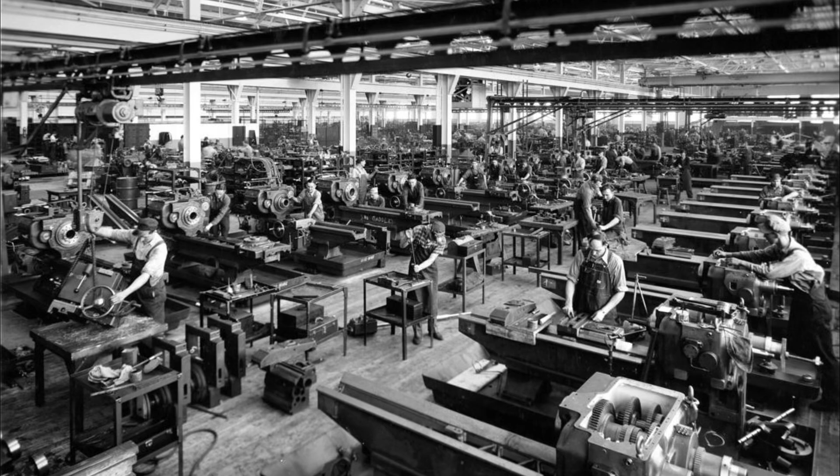In the fall of 1943, a machine running on Factory Street in Rockford, Illinois, had never seen the aircraft it was helping to build. It never would. The machine was an Ingersoll transfer line, a chain of 12 cutting stations linked by an automated conveyor, each station removing a precisely calculated amount of metal from a cast iron blank, moving through at a rate no human hand could match and no single machine could sustain.

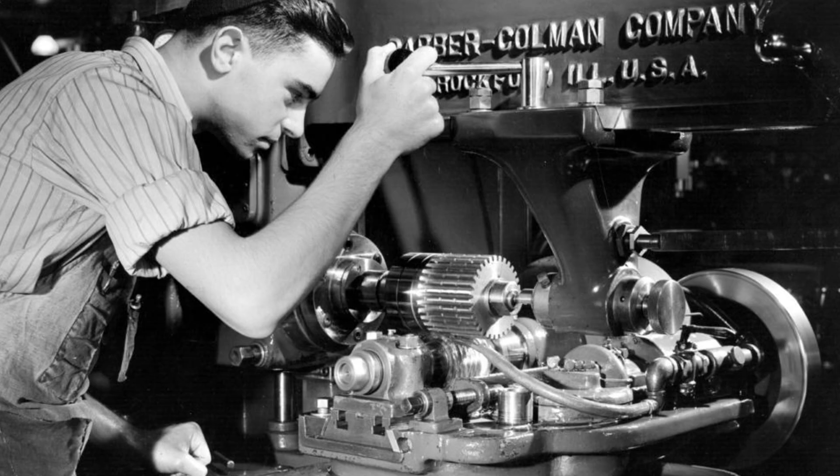At the end of the line, what had entered as a raw casting emerged as a finished crankcase for the Wright R3350 Duplex Cyclone, the 18-cylinder, 2,200 horsepower engine that would power the B-29 Superfortress over the Pacific.

The tolerances on that crankcase were held to 2 ten-thousandths of an inch, not 2 thousandths. Two ten-thousandths, a dimension smaller than the width of a human hair, held across a cast iron surface the size of a kitchen table, repeated 500 times per 8-hour shift by a machine that did not know what it was making and did not need to.

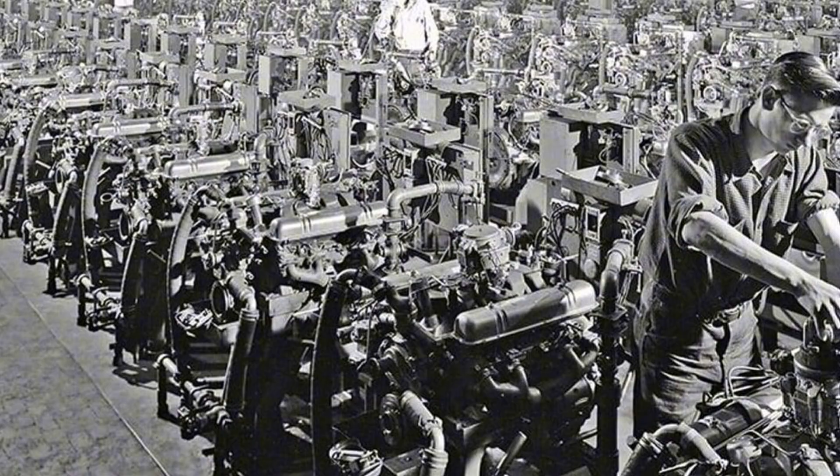The machine that held those tolerances was designed in Rockford, Illinois, built in Rockford, Illinois, shipped from Rockford, Illinois by men who would spend their careers building things they would never fully see the purpose of, and who understood, in the way that skilled industrial workers understand things, that the purpose was not theirs to see. Their job was the tolerance. The tolerance was the point.

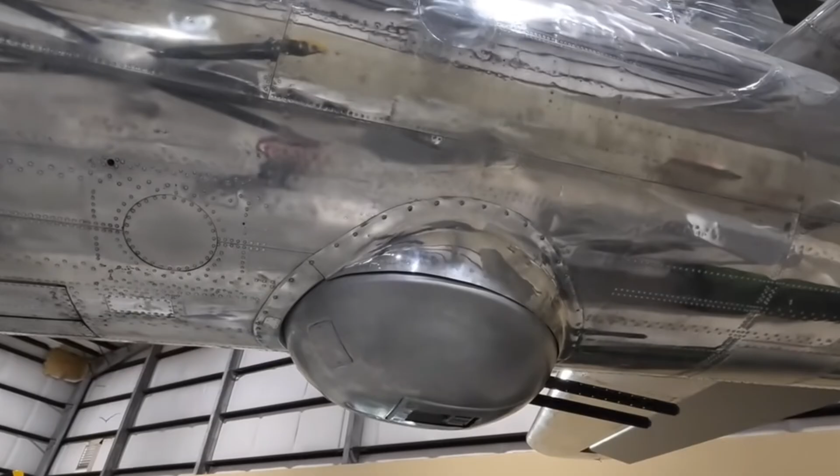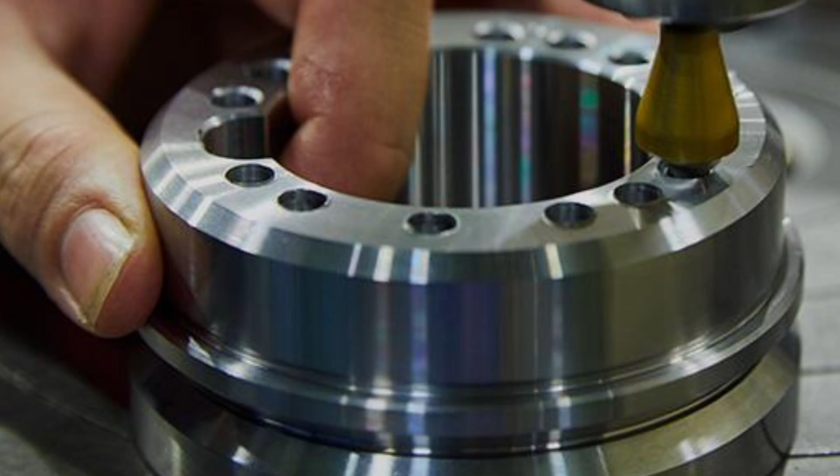By 2001, the company that built that machine no longer existed. The name Ingersoll had been sold. The Factory Street plant had gone quiet. The 4,000 men and women who had worked three shifts a day through the war years, through the post-war boom, through the golden decade of American automotive manufacturing, were gone. Rockford, Illinois, the city that had produced more machine tools per capita than any city in America at the height of its power, was reckoning with what a Rust Belt city reckons with when the last plant closes and the county employment office runs out of forms.

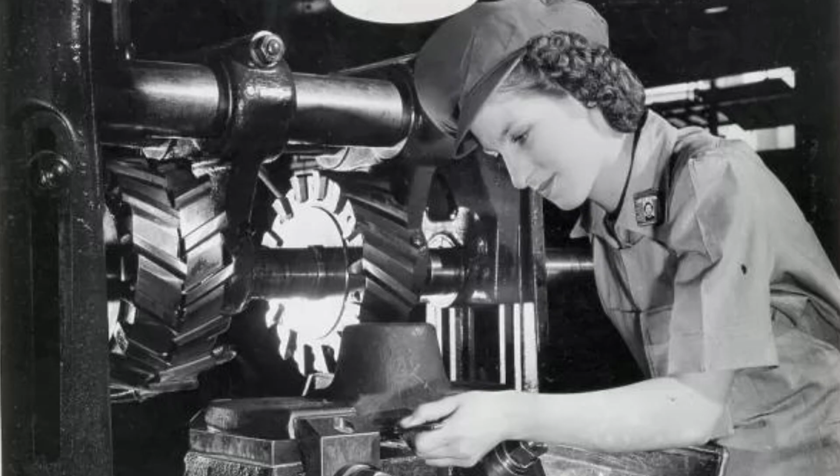A decade before the end, Ingersoll had been the company that every major American automaker called when they needed to retool a plant: General Motors, Ford, Chrysler. When they needed a system, not a machine - a system capable of taking a raw casting in one end and delivering a finished engine block out the other without a human hand touching the metal between stations - there was one American company whose engineering staff could design it, whose factory could build it, and whose installation teams could commission it and hand it over to production running at rated cycle time.

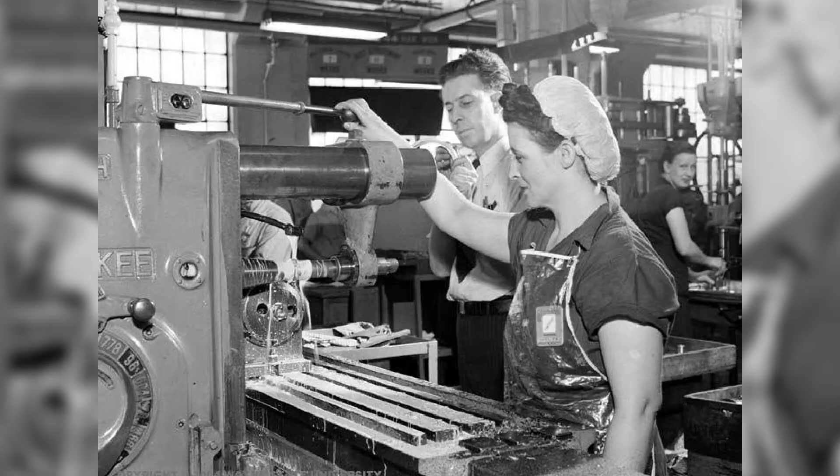That company was Ingersoll. But the real story of Ingersoll Milling Machine is not the story of a company that failed to compete. It is the story of a manufacturing philosophy, the American belief that precision at scale, achieved through specialized machinery engineered for a single purpose and built to last 20 years, was the foundation on which industrial civilization rested. And what happened when the market decided it was wrong?

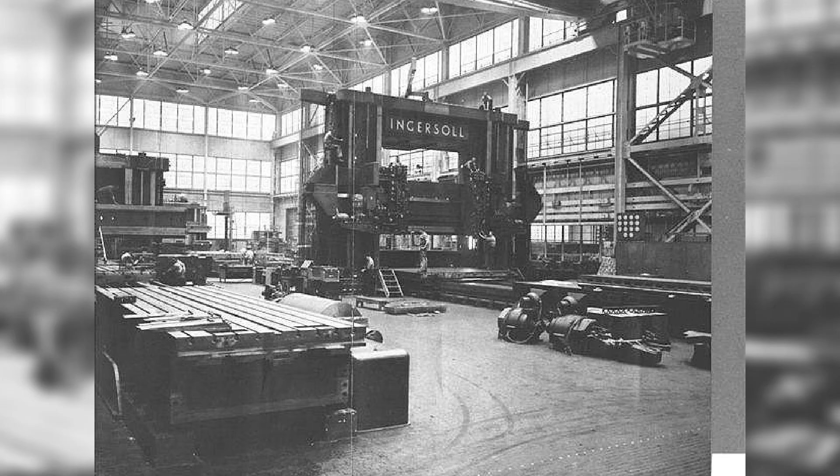Rockford had iron. It had rail access. It had men who knew how to work metal. What it did not yet have was a company that could translate those assets into something the American factory had never been offered before. Leander Ingersoll founded the Ingersoll Milling Machine Company on Factory Street in 1887. He was a machinist by trade, trained in the Illinois River Valley tradition of practical mechanical engineering, the tradition that built farm equipment and river machinery and the early infrastructure of a continent that was still being assembled.

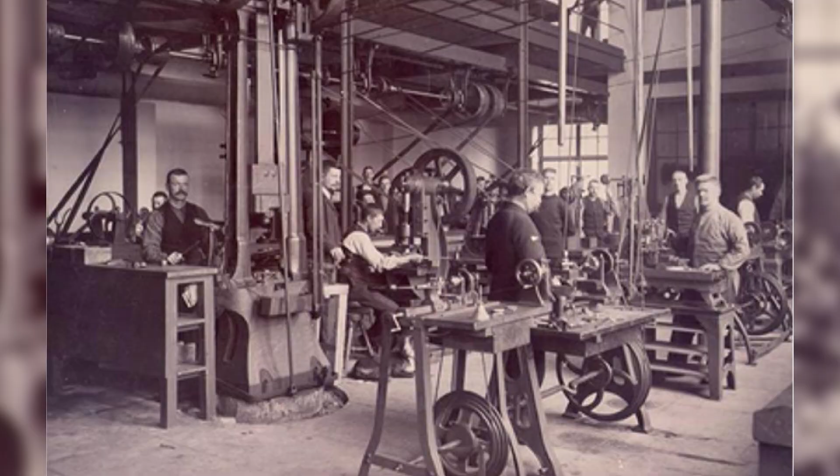He had watched the American factory floor long enough to understand its central problem, and the central problem was not precision. American machinists had precision. The central problem was repeatability at volume, the ability to produce not one correct part, but 10,000 correct parts to the same dimension at a cost per unit that made mass production economically possible.

The machine tool of Leander Ingersoll's era was by design a general-purpose instrument - a milling machine, a lathe, a drill press. Each was operated by a skilled machinist who set up the work, made the cut, measured the result, and moved to the next piece. The skill was in the man. The machine was a platform for that skill. And for a century of American manufacturing, that relationship had been sufficient.

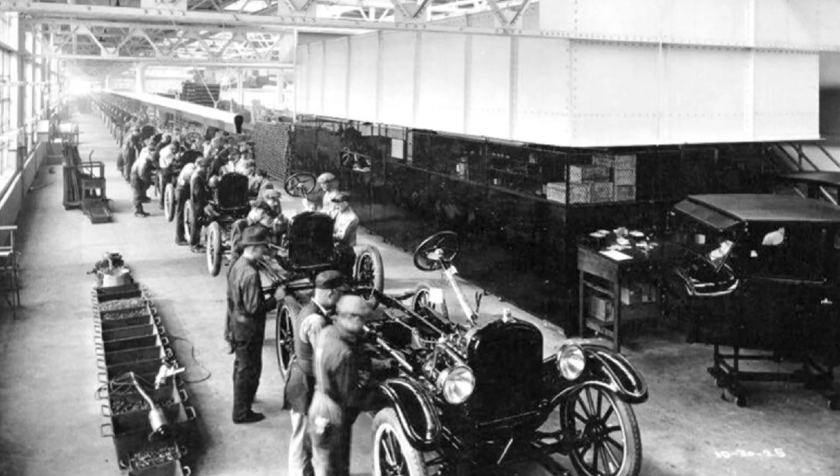It was no longer sufficient. Henry Ford had begun to make clear in the decade before Ingersoll's founding, and in the decades immediately after, the future of American manufacturing was not skilled machinists producing parts one at a time. It was systems producing parts continuously, one after another, without interruption, without setup time between pieces, without the accumulated variation that even the most skilled machinist introduced when he repositioned a part by hand. Ford did not need better machinists. Ford needed a machine that did not require a machinist between parts.

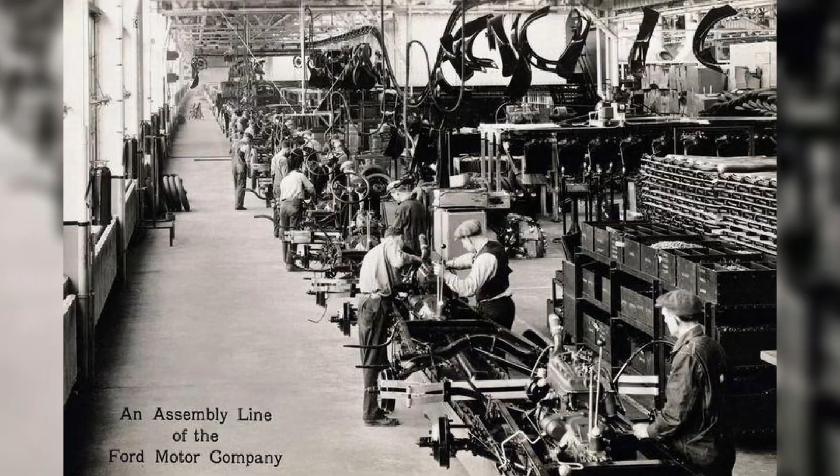What the American factory floor was missing in 1887, in 1900, and in 1910 was a transfer line. A transfer line is not a machine in the sense that a milling machine or a lathe is a machine. It is a system, a series of machining stations linked by an automated conveyor that moves the workpiece from station to station without human intervention.

Each station performs one operation. A drilling head bores a specific set of holes to a specific depth. A milling head removes a specific surface to a specific flatness. A tapping station threads a specific set of holes to a specific pitch. The workpiece arrives at each station in the same orientation, held in the same fixture, located to the same datum surfaces every time, because the fixture does not change between pieces and the conveyor does not deviate.

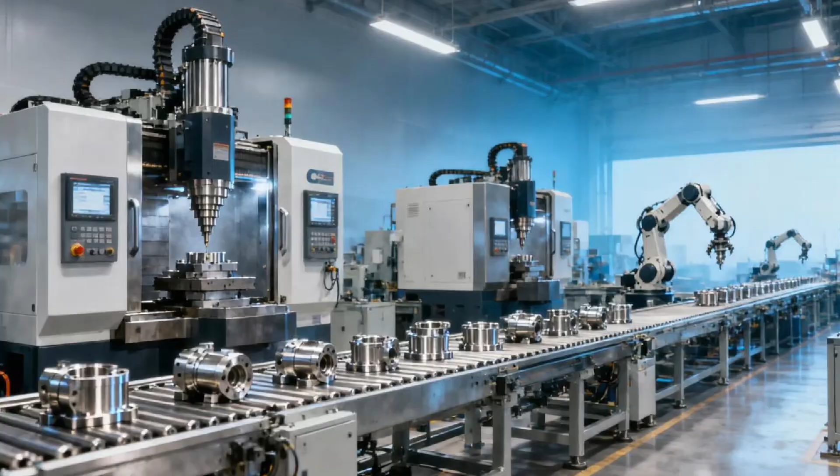The variation that a skilled machinist could not prevent when repositioning a part by hand was eliminated not by improving the machinist, but by removing the repositioning.

Ingersoll did not invent the concept, but Ingersoll was the first American company to engineer it at the scale and precision that the American automotive industry required, and to build the organizational capability to design, manufacture, and install custom transfer line systems for customers whose production requirements were unlike anything the machine tool industry had previously been asked to solve.

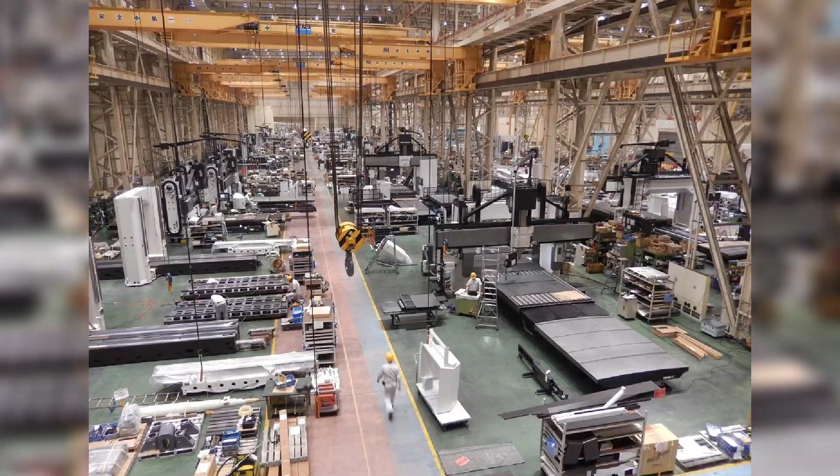The first major transfer line Ingersoll delivered to the American automotive industry went to Ford's River Rouge complex in Dearborn, Michigan, in the early 1920s. The contract value was in the range of $800,000 to $1.2 million, the equivalent of $13 to $18 million today.

It was not sold through a machine tool dealer. There were no machine tool dealers who handled equipment of this scale and complexity. Ingersoll's engineering staff went directly to Ford's plant engineers, designed the system to Ford's production specifications, built it on Factory Street, and installed it in Dearborn with Ingersoll's own installation crews. That model - direct engineering engagement, custom design, factory build, factory installation - was not a sales strategy. It was the only way the product could exist.

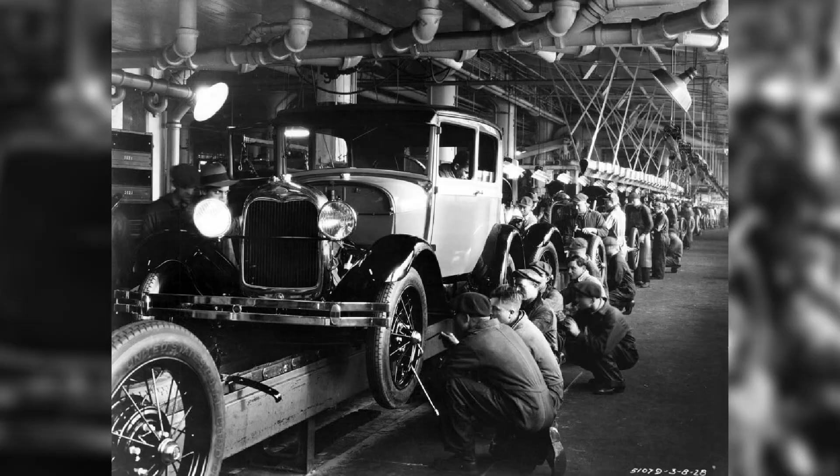A transfer line was not a catalog item. It was an engineered solution to a specific production problem, and no two were identical. The engineering knowledge required to design one correctly lived inside Ingersoll's staff. It could not be purchased from a distributor or reverse engineered from a competitor's catalog, because no competitor's catalog contained it.

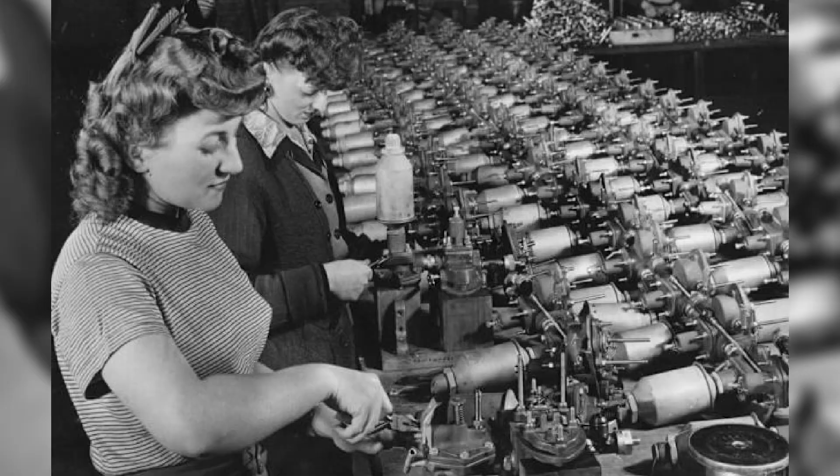American Machinist magazine covered the River Rouge installation as a milestone in American production engineering. The Thomas Register of American Manufacturers listed Ingersoll under a category that had effectively one entry. By the late 1920s, when General Motors began its first major plant expansion under Alfred Sloan's divisional production system, the call went to Rockford. At its peak, the Factory Street plant employed approximately 4,000 workers across engineering, manufacturing, and field installation. They were not interchangeable with the workforce of any other machine tool builder in America, because the work they did did not exist anywhere else in America.

That was Ingersoll's advantage. It was also, as the story will show, the precise nature of its vulnerability. But in 1932, none of that was visible yet.

In 1932, Ingersoll was about to build something that would define American manufacturing for the next 50 years and put an 8-cylinder engine under the hood of every American who could afford one.

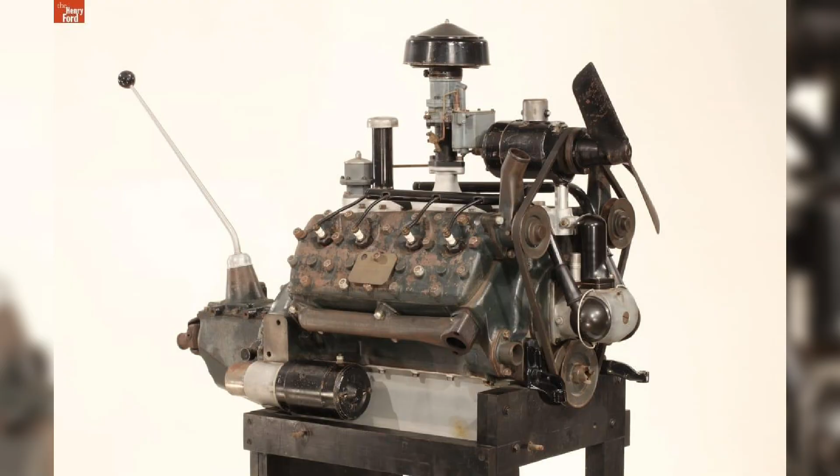In the spring of 1932, Ford Motor Company had a problem. Henry Ford had promised the American public a V8 engine in a car priced for the working man. The engineering was solved, the metallurgy was solved. The problem was production. A V8 engine block, 8 cylinders arranged in 2 banks of 4, cast as a single iron unit, was among the most geometrically complex castings the American automotive industry had ever attempted to machine at volume. It required more than 400 individual machining operations, drilling, boring, milling, tapping, reaming each, to tolerances that the engine's performance depended on, each to be repeated on every block that came down the line at a production rate that made the Ford V8 affordable at the price Ford had publicly committed to.

No single machine could do it. No team of machinists working individual machines could do it at the volume Ford needed at the cost Ford required with the consistency Ford's tolerances demanded. Ford called Rockford. The transfer line that Ingersoll designed and delivered for the Ford V8 engine block was unlike anything the American factory floor had seen.

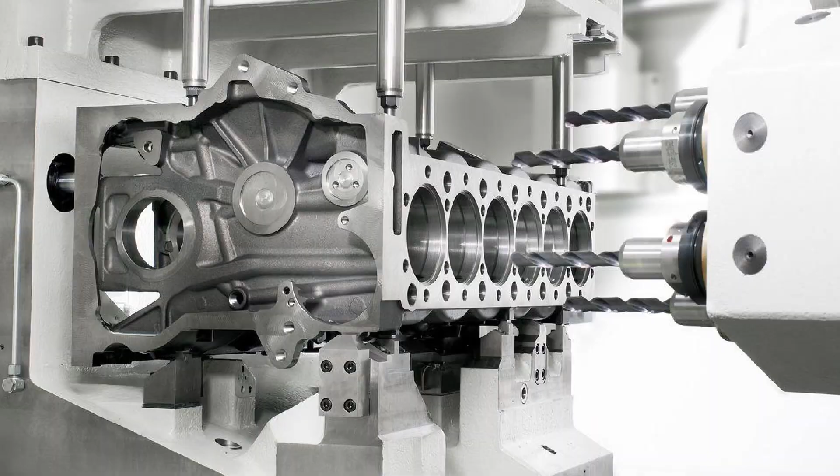It ran more than 60 feet from end to end, longer than the distance from home plate to first base on a regulation baseball diamond. It weighed in total over 200 tons of cast iron, precision ground steel, and hardened tooling. It contained 15 machining stations, each equipped with custom-designed spindle heads, the rotating assemblies that held and drove the cutting tools, positioned to engage the casting at angles and depths calculated specifically for that one engine block and no other.

At each station, the block was located, positioned, and clamped in a fixture, a precision-machined iron casting that held the workpiece against 3 datum surfaces, ground flat to within 0.005 of an inch per foot, so that every block arrived at every cutting tool in exactly the same position as every block before it. The fixture did not adjust. The conveyor did not vary. The spindle head did not compensate for human judgment. The system assumed that if every input was controlled, every output would be correct, and it was right.

The cycle time was 48 seconds per station, 15 stations, 1 block entering the line every 48 seconds, 500 finished engine blocks per 8-hour shift. At $12 million for the complete installation, the equivalent of approximately $260 million today, the Ford V8 transfer line was not a machine tool purchase.

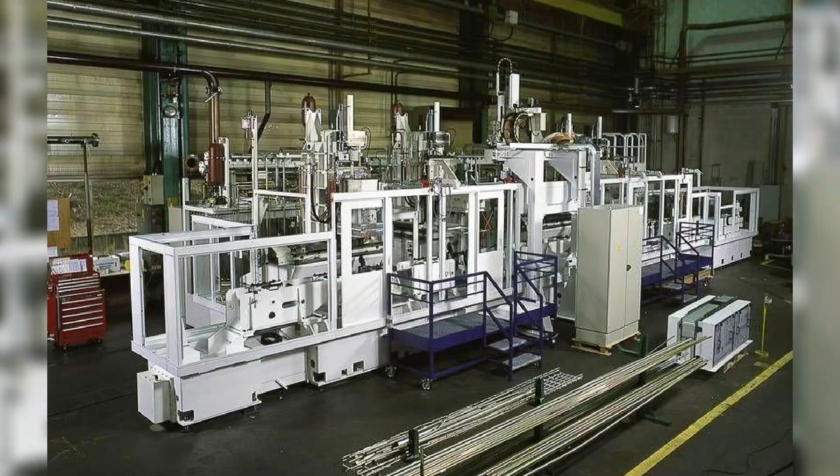It was a capital infrastructure decision of the same order as building a new foundry or acquiring a stamping plant. A senior Ford machinist in 1932 earned approximately 75 cents an hour. The transfer line cost more than 8 million hours of that machinist's labor. Ford signed the contract because the arithmetic was not close. The transfer line would pay for itself in reduced labor cost within 4 years of operation, and it would run for 20.

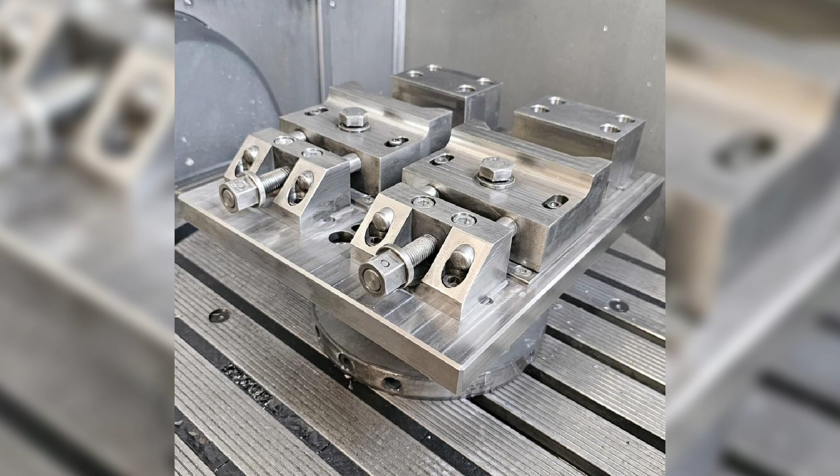No Japanese machine tool builder could have offered an equivalent system in 1932. No German builder, no British builder. The engineering knowledge to design a 15-station transfer line for a V8 engine block, to calculate the cutting forces at each station, to design the fixture datums, to specify the spindle-bearing preloads that would hold tolerances across 3 shifts a day for 2 decades existed in one place on Earth. It existed on Factory Street in Rockford, Illinois, in the heads of Ingersoll's engineering staff, and in the accumulated drawings and process records of 30 years of custom transfer line work. That was Ingersoll's moat, not a patent, not a price advantage, not a distribution network. Knowledge-specific, accumulated, non-transferable knowledge that no competitor could acquire without building the same history that had produced it.

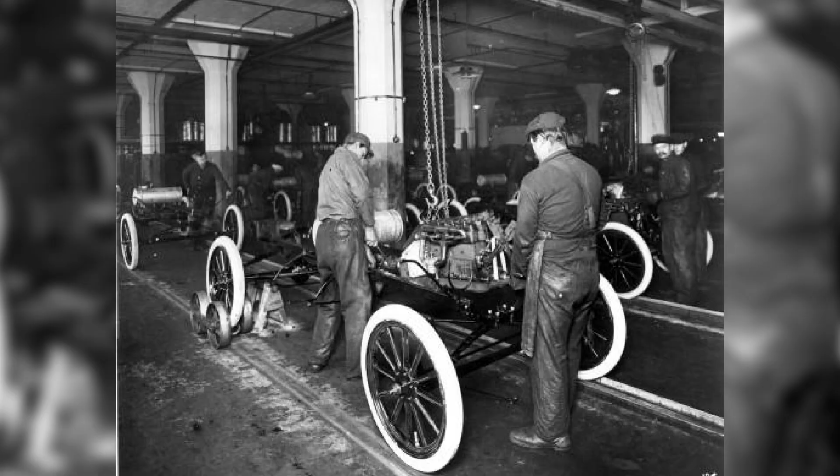The Ford V8 went into production in the spring of 1932. It was priced at $460 for the base model, the first V8 automobile available to American working families at a price they could consider. Within 2 years, Ford had sold over 1 million V8-powered vehicles. The engine that made that possible was machined on an Ingersoll transfer line in Dearborn, Michigan, running at 500 blocks per shift, holding tolerances that Ford's own engineers had initially questioned whether any machine system could maintain.

General Motors ordered its first Ingersoll transfer line for the Chevrolet engine plant in Flint, Michigan, before the Ford installation was complete. Chrysler followed within 18 months. By 1936, every major American automotive engine plant was either running Ingersoll transfer line equipment or waiting for a delivery slot on Ingersoll's Factory Street production schedule.

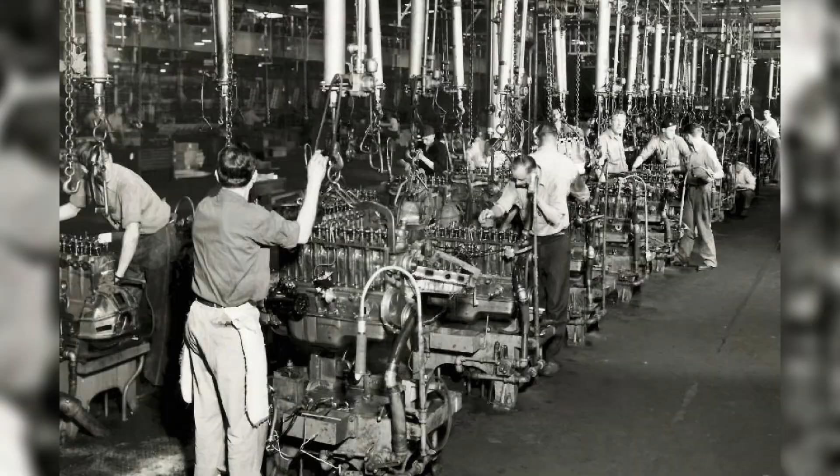The institutional endorsement list was not assembled over decades. It arrived in a single decade because the Ford V8 contract was not a reference sale. It was a demonstration visible to every plant engineer in the American automotive industry that Ingersoll had solved a problem the industry had not known how to state precisely until Ingersoll stated it for them. The problem was this: precision at volume achieved through a system engineered for one purpose was worth more than flexibility achieved through general-purpose machines operated by skilled men. When the part was complex enough, and the volume was high enough, and the tolerances were tight enough, the transfer line did not merely outperform the alternative. It made the alternative impossible.

The nameplate on the transfer line's main frame read, Ingersoll Milling Machine Company, Rockford, Illinois. In every engine plant that ran one, that nameplate was not a city of origin. It was a production guarantee. The Ford V8 contract had done something that no amount of advertising in American Machinist magazine could have accomplished. It had made Ingersoll's capability legible to every plant engineer in American industry, not as a promise in a catalog, but as a running system in a production plant that anyone with sufficient credentials could visit, observe, and measure against their own production problems.

The visits came. Through the late 1930s, Ingersoll's Factory Street engineering staff was simultaneously designing transfer line systems for General Motors engine plants in Flint and Pontiac, Michigan, for Chrysler's Dodge main facility in Hamtramck, Michigan, for the Studebaker Corporation's South Bend, Indiana engine plant, and for a growing list of non-automotive industrial customers who had read the Ford V8 story in American Machinist and understood that the transfer line principle was not limited to engine blocks. Any complex casting produced in sufficient volume at tight tolerances was a candidate. Ingersoll's engineering staff was prepared to make that case in any plant engineer's office in America, backed by a reference list that was growing faster than any competitor could read it.

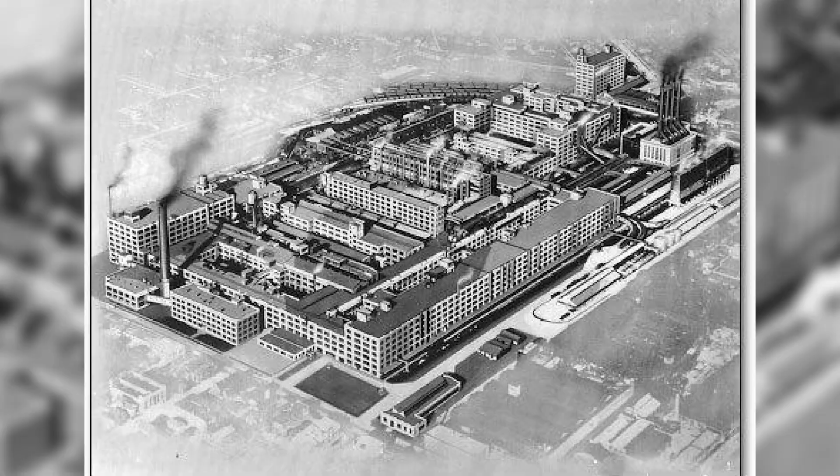By 1940, Ingersoll had delivered more transfer line systems to American industry than all other builders combined. That was not a marketing claim. It was an arithmetical fact because no other builder had the engineering staff, the factory street manufacturing capacity, or the installation crew infrastructure to compete at Ingersoll's volume and complexity.

Rockford was not merely the location of Ingersoll's factory. Rockford was the reason Ingersoll's factory could exist. The Swedish and Norwegian machinist tradition, the iron casting suppliers in the surrounding counties, the apprenticeship pipeline from the Rockford Public School vocational programs that fed trained hands into Factory Street year after year.

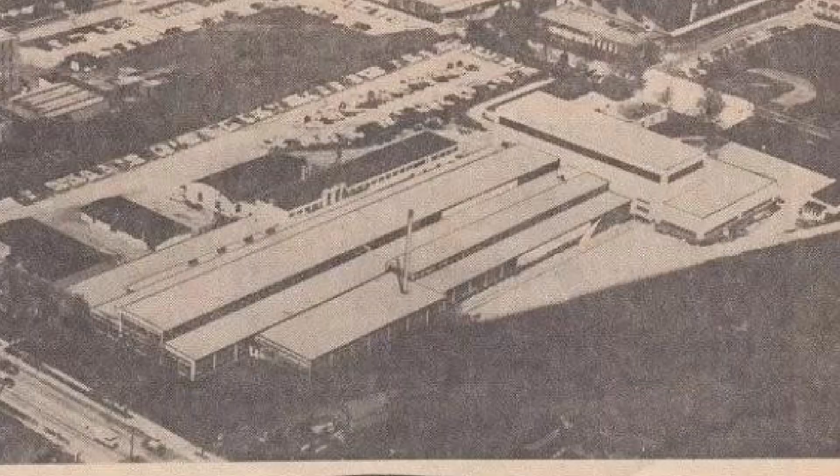Then the war came, and Ingersoll became something larger than a machine tool builder. In the spring of 1940, the United States Army Air Corps, soon to become the Army Air Forces, began the largest military aviation procurement program in American history. The targets were staggering: 96,000 aircraft in 1944 alone, more than the combined production of Germany, Japan, and Italy. Every aircraft in that program required engines. Every engine required a machined block, a machined crankcase, a machined cylinder head. Each held to tolerances that flight safety demanded and that no individual machinist working a conventional machine tool could maintain across the production volumes the program required.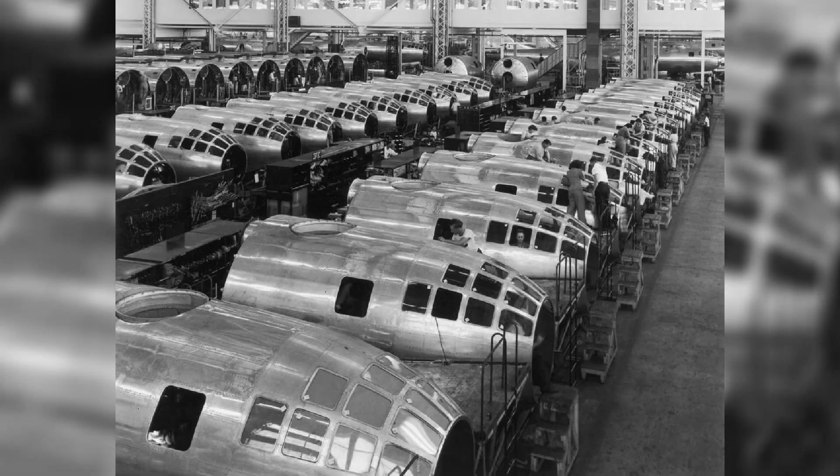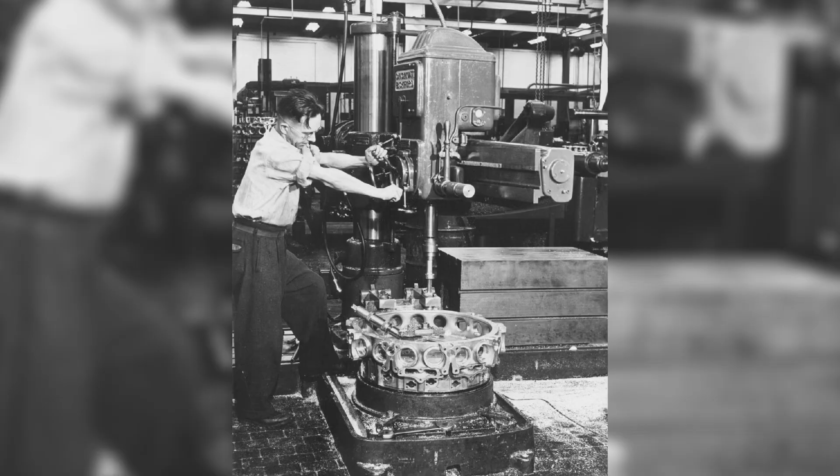The Army Air Force's procurement office knew where to call. Ingersoll received contracts for wing spar milling machines for the Boeing B-17 Flying Fortress program, massive horizontal milling systems designed to hold the aluminum wing spar, the structural backbone of the B-17's wing, to a flatness of 0.002 inches over a length of 30 feet. A wing spar that deviated from flatness by more than that specification would affect the aerodynamic characteristics of the wing under load. At altitude over Germany with a full bomb load and anti-aircraft fire coming up from below, the consequences of a spar machined out of tolerance were not theoretical. Ingersoll built the machines that held the tolerance. Boeing built the aircraft that flew on it.

The Wright Aeronautical Corporation's plant in Paterson, New Jersey, ran Ingersoll transfer line equipment to produce the crankcase and cylinder head components for the Wright R-3350 Duplex Cyclone, the 18-cylinder radial engine that powered the B-29 Superfortress. The R-3350 was the most powerful aircraft piston engine in American production during the war, and it was among the most dimensionally demanding. The crankcase alone required more than 300 individual machining operations held to tolerances that the engine's bearing clearances, measured in 10,000ths of an inch, made non-negotiable. A crankcase bored 2 10,000ths out of specification would produce an engine with premature bearing wear.

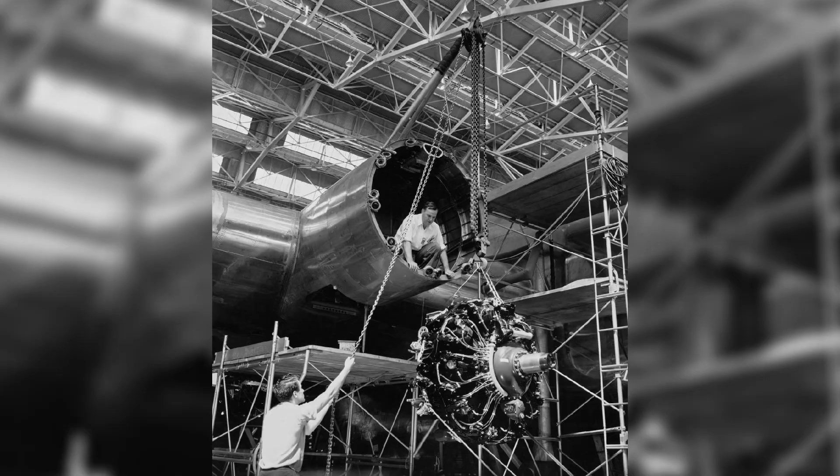An engine with premature bearing wear on a B-29 at 30,000 feet over the Pacific was not a maintenance problem. It was a mission abort, or worse.

The Ingersoll transfer line running at Wright Aeronautical's Paterson plant in the fall of 1943 produced the crankcase for the Wright R-3350 Duplex Cyclone, the engine that powered the B-29 Superfortress. The tolerances on that crankcase were held to 2 ten-thousandths of an inch.

The machine that held them was built in Rockford, Illinois, by men who would never see the aircraft it helped put in the sky.

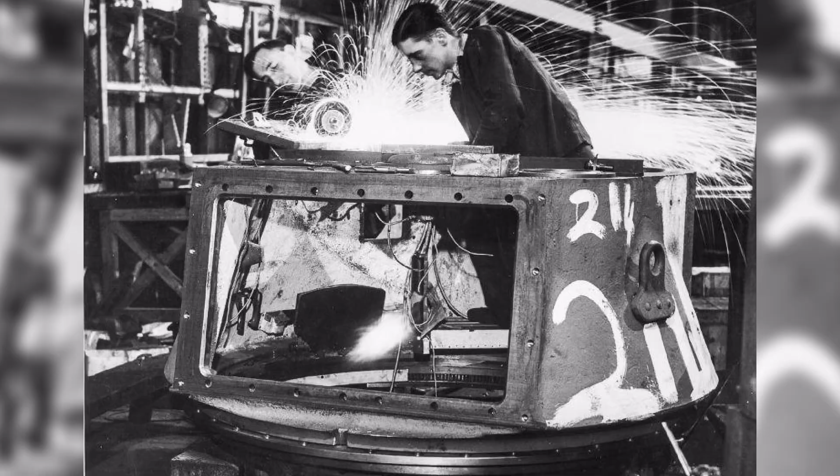At the American Car and Foundry plant in Berwick, Pennsylvania, Ingersoll equipment machined the turret ring, the precision-bored circular track on which the M4 Sherman tank's turret rotated, for the primary American medium tank of the war. The turret ring required a bore diameter held to within 1/1000th of an inch across a circle 36 inches in diameter. Out of specification, the turret would bind under the lateral forces of combat movement.

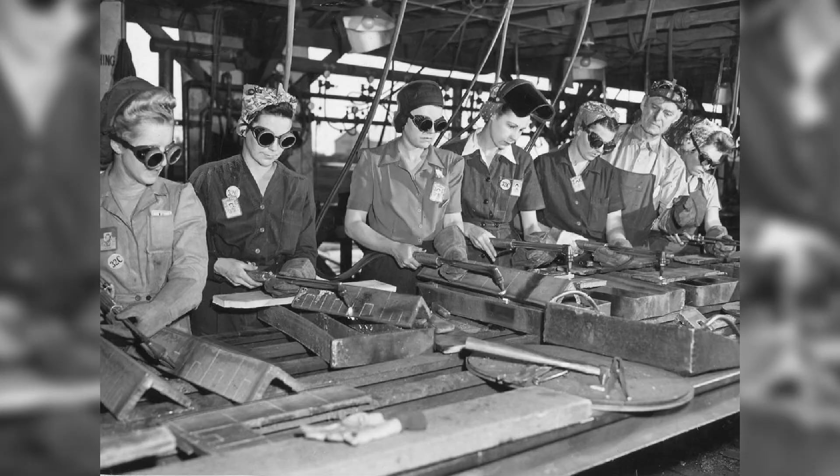Ingersoll machined 49,000 turret rings for the Sherman program between 1942 and 1945. The Army Ordnance Corps did not record a single rejection on dimensional grounds attributable to Ingersoll equipment.

The Factory Street plant ran three shifts, seven days a week, from December 1941 through August 1945. Employment reached approximately 4,000 workers at peak: engineers, machinists, assemblers, installers, and the drafting room staff whose drawings translated production requirements into machining systems that had never existed before and would never be built again in exactly that form.

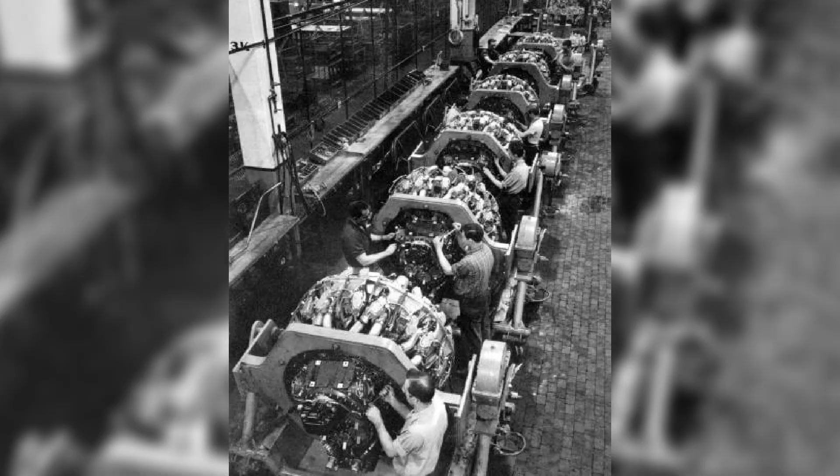Each transfer line was a custom solution. Each drawing set was unique. Each installation was a field engineering problem solved by Ingersoll crews working in defense plants under production schedules that did not accommodate delays. Rockford in 1943 was a city running at the limit of its productive capacity, and the limit was considerable.

What none of those 4,000 workers on Factory Street could see, what no plant engineer ordering an Ingersoll transfer line for a post-war automotive expansion could see, was that the same characteristic that made the transfer line irreplaceable was the characteristic that would eventually make it vulnerable.

A transfer line engineered for one engine block could not be retooled for a different engine block without an engineering effort approaching the cost of a new system. It was precise because it was fixed. It was productive because it was specialized. And specialization, in a market that was about to begin changing faster than any fixed system could follow, was not only a strength — it was a debt coming due.

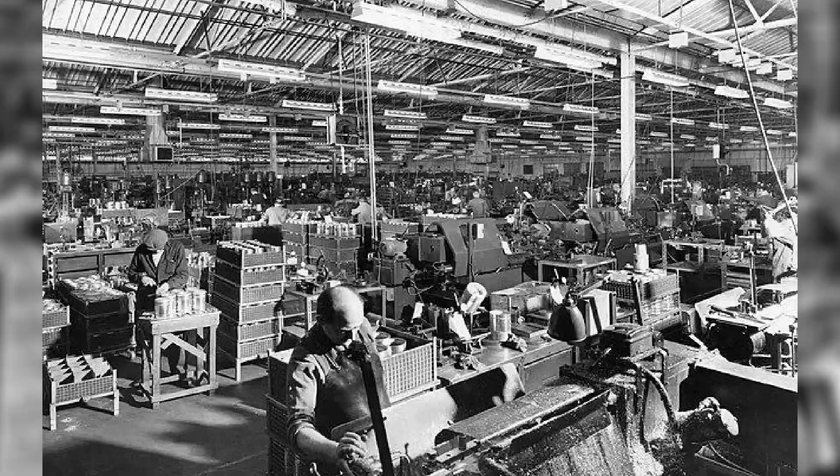The post-war decade was the best Ingersoll had ever seen, and it arrived without interruption. American soldiers came home in the fall of 1945 to a country whose industrial capacity had not been bombed, whose machine tool factories had not been converted to rubble and then rebuilt from foreign aid, and whose automotive industry was preparing to do something it had been unable to do since 1941: build passenger cars for American families who had spent four years saving money and waiting.

The pent-up demand for American automobiles in 1946 was not a market condition. It was a geological pressure, and when it released into the largest sustained automotive expansion in the history of the industry, General Motors alone opened or retooled 11 engine plants between 1946 and 1955.

Ford retooled its Dearborn and Cleveland engine facilities twice in the same period. Chrysler expanded its Trenton, Michigan engine plant to a capacity that required four new transfer line systems, all delivered from Rockford.

The overhead valve V8 engine, introduced by Cadillac and Oldsmobile in 1949, adopted by Chrysler in 1951, by Ford in 1954, and eventually by every American automaker, was a more complex casting than the flathead V8 it replaced, with more machining operations, tighter bearing tolerances, and higher surface finish requirements on the combustion chamber walls.

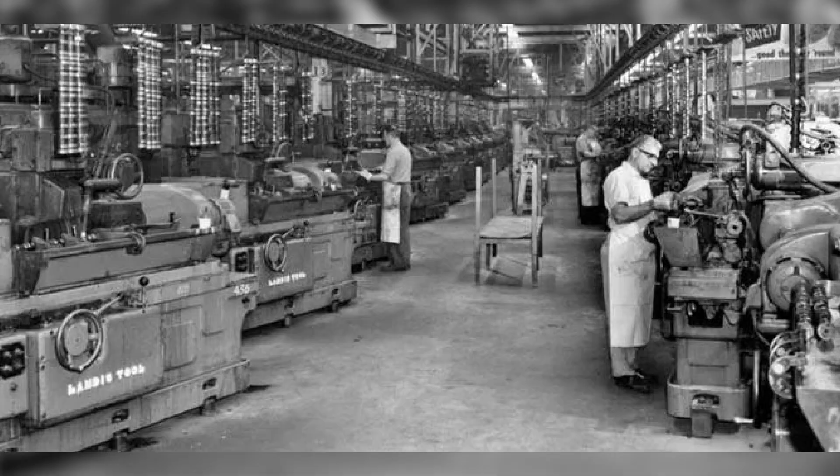Every additional complexity was an additional argument for the Ingersoll transfer line. Every tighter tolerance was a reason to call Rockford rather than attempt the work on general-purpose machines. Every new engine program at every Big Three plant began with an engineering conversation between the automaker's production engineers and Ingersoll's application staff, a conversation that typically ended with a contract and a delivery schedule measured in months, not weeks, because what Ingersoll was building could not be rushed without compromising the engineering that made it worth building.

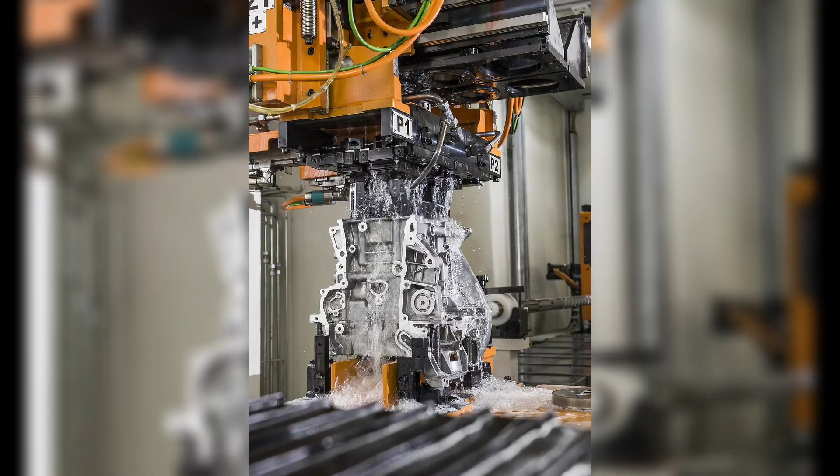Through the 1950s and into the 1960s, Ingersoll's Factory Street plant was running at a pace that the post-war expansion had established as normal, and that the American automotive industry's relentless product cycle was sustaining.

A new engine every 3 to 5 years from each of the Big Three divisions meant a new transfer line every 3 to 5 years from each of those plants, and the Big Three had collectively more than 30 engine manufacturing facilities in operation by 1960. The arithmetic was straightforward. The order book at Factory Street was never empty.

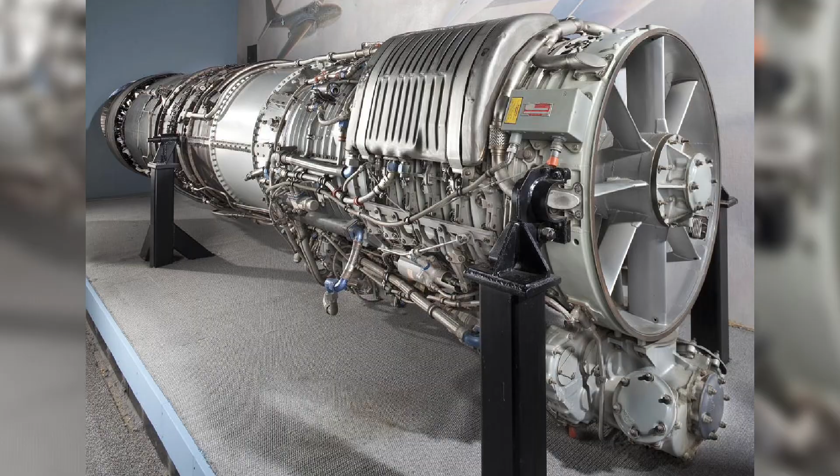The aerospace programs of the same decade added a dimension to Ingersoll's work that automotive contracts alone could not have provided: the Cold War defense build-up, the B-52 Stratofortress program, the Pratt & Whitney J-57 jet engine that powered it, the General Electric J-79 that powered the F-104 Starfighter and the B-58 Hustler, which required precision machining of jet engine components at tolerances that exceeded automotive standards by an order of magnitude, including jet engine casings, compressor discs, and turbine housings.

These were not cast iron engine blocks. They were titanium and high-temperature nickel alloys machined to millionths of an inch on equipment that had to maintain that accuracy across production runs measured in thousands of units. Ingersoll built the systems. The engineering problems were different from automotive transfer line work. The materials were harder, the tolerances were tighter, the production volumes were lower, but the underlying discipline was the same: understand the workpiece, design the system around it, hold the tolerance every time. Ingersoll's engineering staff had been doing that since the Ford V-8 contract.

The jet engine contracts required them to do it at a level of precision that pushed the boundaries of what fixed-cycle transfer line machining could achieve, and they achieved it because the alternative was to tell the United States Air Force that the work could not be done in Rockford, and that was not an answer Factory Street was prepared to give. By the mid-1960s, Ingersoll Milling Machine Company was at the apex of everything it had been built to be. The Factory Street plant employed close to 4,000 workers.

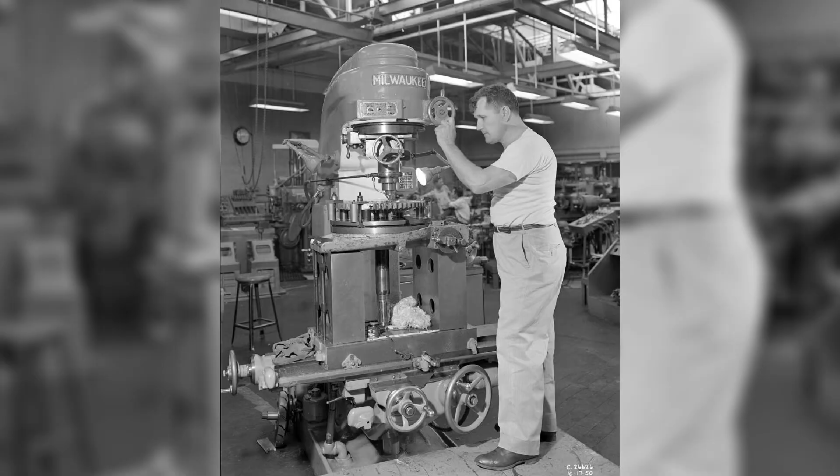The engineering staff, the men who designed the transfer line systems, who calculated the cutting forces, who specified the fixture datums, who wrote the installation procedures, was the largest and most experienced concentration of transfer line engineering expertise in the world — not in the United States, in the world. There was no other city, no other company, no other factory floor where the accumulated knowledge of 50 years of custom transfer line engineering existed at the density it existed on Factory Street in Rockford, Illinois.

In 1965, the machines Ingersoll built in that decade ran in plants that made the cars that filled American driveways, the engines that powered American military aircraft, the components that equipped American manufacturing at a scale the rest of the world was still measuring itself against.

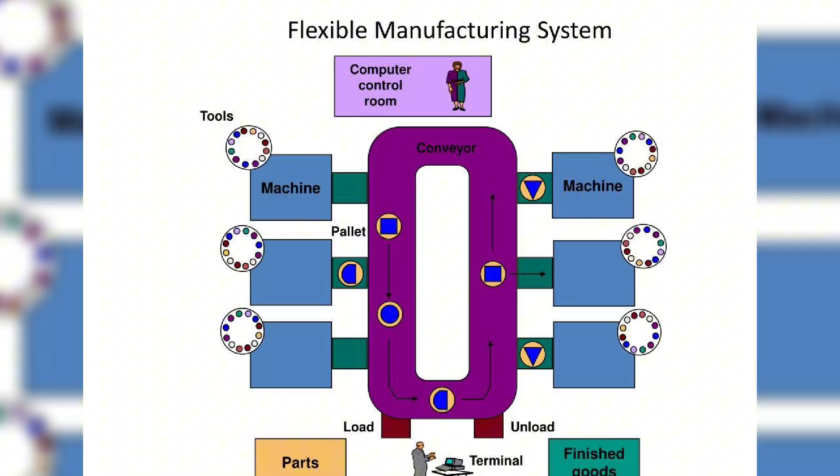A machinist who had spent his career at Factory Street, who had learned to read a transfer line drawing to set up a fixture, to verify a spindle head's positional accuracy with a test indicator and a precision ground reference bar, possessed a professional knowledge that had taken decades to accumulate and that existed nowhere else in the same form. He was, without knowing it, one of the last practitioners of an American industrial art that was about to become unnecessary.

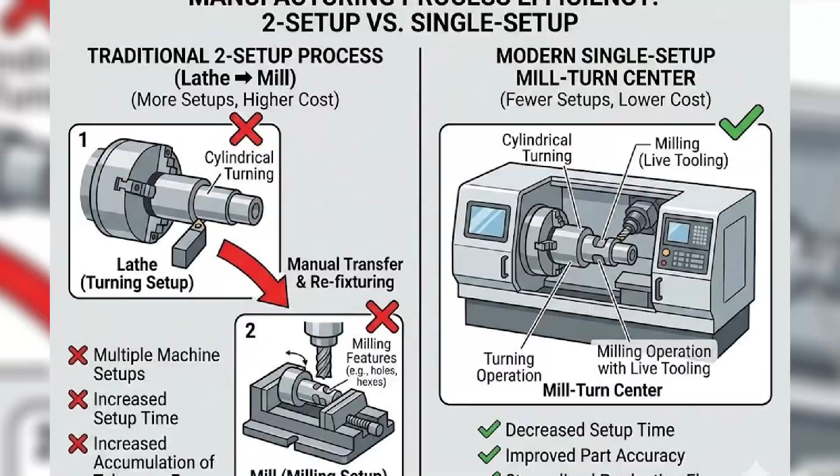Not because the work would stop. The engine blocks would still need to be machined. The tolerances would still need to be held. But the system that held them, the fixed transfer line engineered for one part running one cycle, producing one result with no capacity for variation, was about to meet a market that had decided variation was not the enemy. Variation was the point. Flexibility was the new precision. And flexibility was not something that Factory Street in 1965 had been built to deliver.

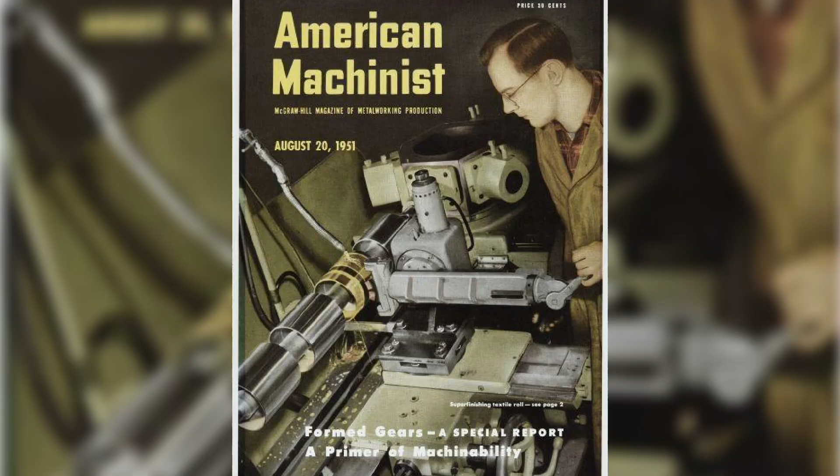The first indication arrived not as a crisis, but as a number. In 1965, Japanese machine tool imports into the United States totaled $28 million. By American Machinist magazine's annual inventory survey, that number represented less than 4% of total American machine tool consumption. It was a footnote — the kind of number that a Factory Street engineering manager reviewed in the NMTBA's annual statistical report, noted without alarm, and set aside in favor of the next delivery schedule on his desk. He should have kept reading.

The number that should have kept the Factory Street engineering manager reading was not the $28 million in Japanese machine tool imports recorded in 1965. It was the trajectory behind that number, the rate at which it was growing, and the reason it was growing, and what the reason implied about the American machine tool market that Ingersoll had spent 80 years learning to serve.

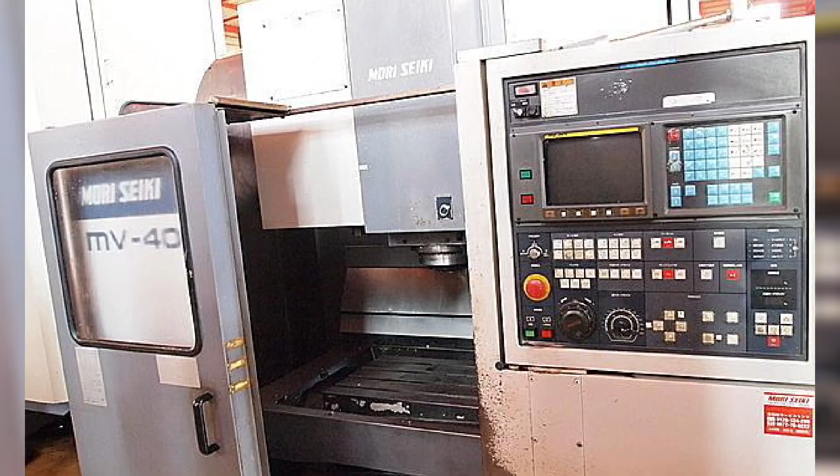Japanese machine tool builders, Mori Seiki, Yamazaki, Mazak, Okuma, Makino, had entered the American market in the early 1960s with a product category that did not exist in Ingersoll's order book and had never needed to. They were selling NC machining centers, numerically controlled machine tools that could perform multiple operations on a single workpiece without the workpiece being moved between machines, guided by a punched tape or digital code rather than by a machinist's hands.

NC stood for numerical control, a system in which the machine's axis movements were directed by a program, not by a skilled operator turning handwheels and reading dial indicators. The first American NC machines had been developed at MIT under Air Force contract in 1952. By 1965, the technology had matured enough that Japanese builders were offering it in catalog form at prices that American job shops could consider without requiring a capital appropriation from a corporate board.

Ingersoll did not sell NC machining centers. Ingersoll sold transfer lines. These were not competing products. A transfer line and an NC machining center were not alternatives to each other in the same way that a freight train and a delivery truck are not alternatives to each other. They move different volumes over different distances for different customers at different costs.

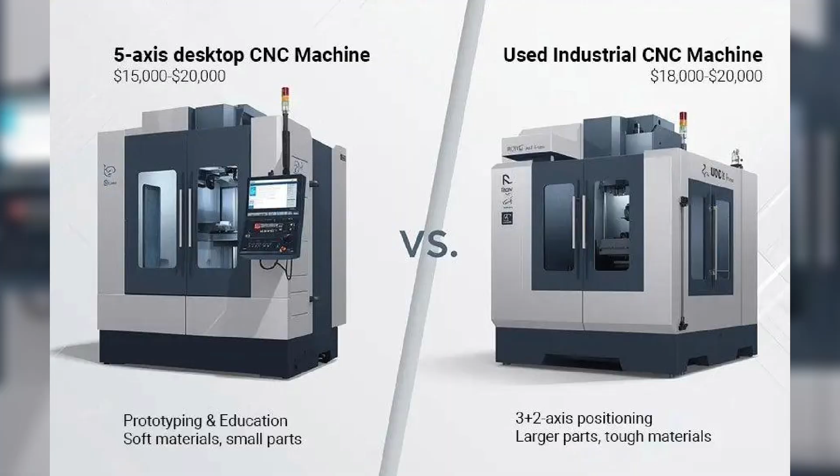A transfer line produced 500 engine blocks per shift. An NC machining center produced perhaps 12 complex parts per shift, with the ability to change programs between parts and machine a different geometry on the next piece. The transfer line was volume. The NC machining center was flexibility. For the American automotive industry of 1965, running plants designed around fixed high-volume production of standardized engine families, flexibility was not what the production superintendent needed. Volume was what he needed. Ingersoll had volume, the Japanese had flexibility, and the market in 1965 was still organized around volume.

What changed was not the technology. What changed was the market the technology served. The 1973 OPEC oil embargo did not merely raise gasoline prices. It restructured the American automotive market in a way that the industry's production infrastructure, the transfer lines, the engine plants, the stamping facilities, had not been designed to accommodate. American consumers confronting gasoline at prices that had been inconceivable 18 months earlier began buying smaller cars in numbers that the Big Three had not forecast and were not equipped to supply from domestic production.

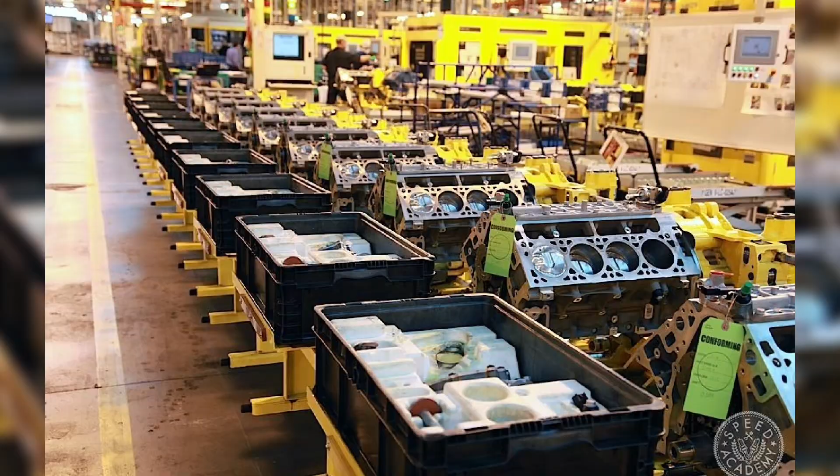The four-cylinder engine, which American automakers had largely abandoned in the 1950s in favor of the V8, returned to the American market not as an economy option, but as the primary powertrain for a new generation of vehicles that Detroit was being forced to develop under time pressure it had never previously experienced.

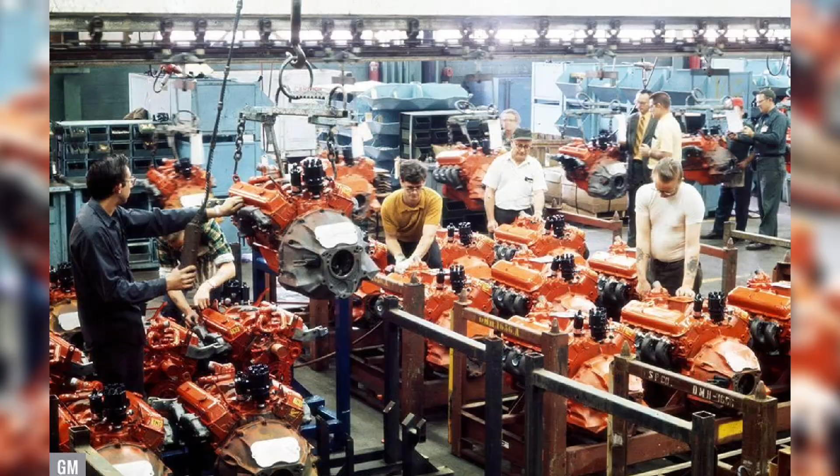A four-cylinder engine block required a transfer line. But it was not the transfer line that was already running in the Flint engine plant, or in the Cleveland engine plant, or in the Trenton engine plant, because those lines had been engineered for V8 blocks, and a V8 block and a four-cylinder block were not the same. Casting did not have the same machining requirements and could not be produced on the same system without an engineering effort that approached the cost of building a new line. The Big Three's investment in Ingersoll transfer line infrastructure, the infrastructure that had given them the highest volume engine production capacity in the world, was now a constraint. The precision and specialization that had been the point of the transfer line was now the problem with it.

General Motors began cautiously at first, and then with increasing urgency, to ask a question that Factory Street had not previously been required to answer: could a transfer line be made flexible? Could a system engineered for one part be re-engineered at reasonable cost and in reasonable time to run a different part when the market required a different engine?

The honest answer from Ingersoll's engineering staff was not easily, not cheaply, not quickly. A transfer line's fixture datums were machined for a specific casting geometry. Its spindle heads were designed for specific hole patterns and surface locations on a specific part. Its cycle time was calculated for a specific sequence of operations on a specific workpiece. To change the part was to change the system, and changing the system meant rebuilding it at a cost and on a schedule that compressed the economic advantage of the transfer line approach precisely when the market was under the most pressure to reduce capital expenditure.

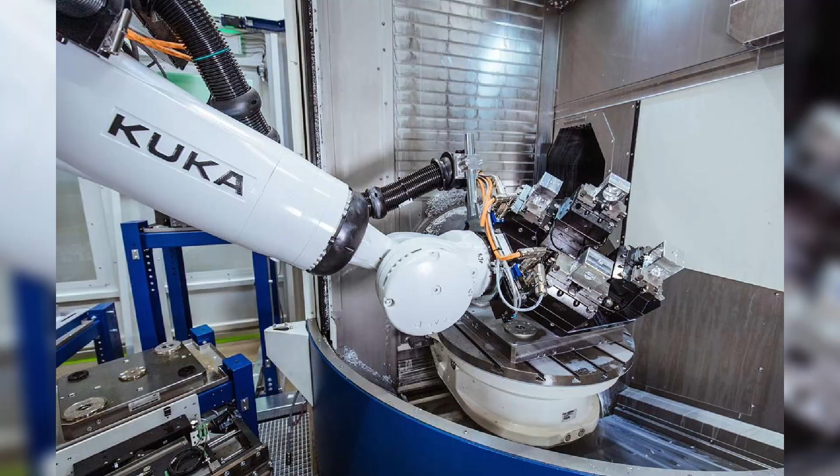General Motors heard that answer in 1974. They began exploring an alternative. The alternative had a name: the Flexible Manufacturing System.

An FMS, Flexible Manufacturing System, used CNC machining centers, computer-controlled conveyors, and automated workpiece handling to produce a family of related parts on shared equipment that could be reprogrammed between part numbers.

The FMS did not match the cycle time of a dedicated transfer line on any single part. It could not. The physics of the situation—changing tools, repositioning fixtures, loading and unloading different castings—imposed a time cost that dedicated tooling eliminated. But the FMS could run three different engine block variants on the same equipment in the same shift, and when the market required a fourth variant, the reprogramming cost was a fraction of the retooling cost on a dedicated line. In 1975, Ingersoll recognized the threat clearly enough to attempt a response.

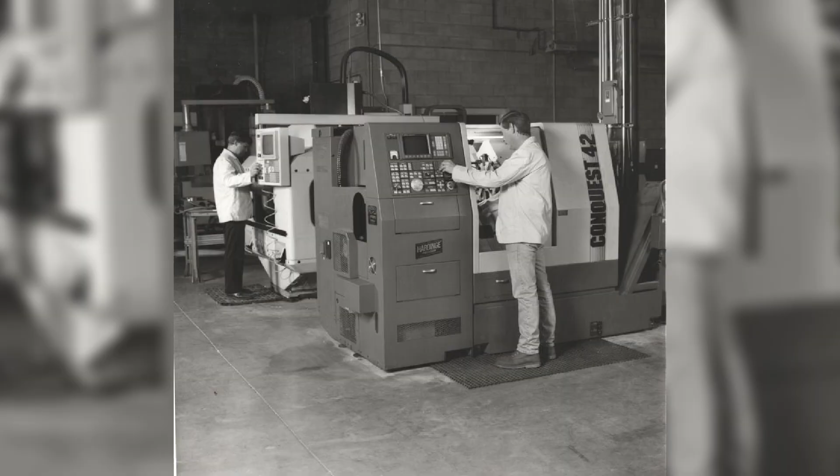The response was rational. It was well-engineered. It was too late. Ingersoll's engineering staff began developing large-scale CNC machining systems—not the catalog NC machining centers that Mazak and Okuma were selling to American job shops, but heavy-duty CNC systems designed for the kind of large complex castings that automotive and aerospace customers required.

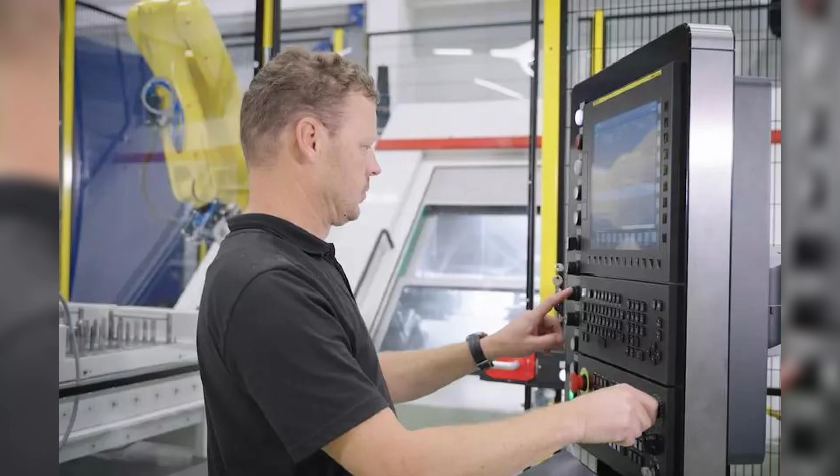The machines were impressive, the engineering was sound, but Ingersoll was attempting to enter a product category that Japanese builders had been developing for a decade, with controller technology—the Fanuc CNC controller, produced by a Japanese company that by 1980 controlled more than 50% of the world's CNC controller market—that Ingersoll did not manufacture and had no competitive alternative to offer.

An American job shop in 1980 that was specifying a new CNC machining center was specifying a Fanuc controller. Not because Fanuc was the only controller available, but because Fanuc was the controller that the shop's programmers already knew, that the tooling suppliers had already written canned cycles for, that the next machinist hired would already have been trained on. The Fanuc controller had become the programming language of American CNC machining, and Ingersoll, whose engineering heritage was in custom transfer line systems rather than in CNC controller development, had no entry in that language.

The pivot that might have saved Ingersoll—an early committed investment in flexible manufacturing systems begun in 1972 rather than 1975, built around a CNC controller strategy rather than around the transfer line engineering heritage that had made Factory Street great—was not made. It is not certain that it could have been made in time. The organizational identity of a company that had spent 85 years engineering fixed, dedicated, high-volume production systems was not an asset in the development of flexible, reprogrammable, moderate-volume machining systems.

The knowledge was different. The customer relationship was different. The sales cycle was different. The engineering culture was different. What Ingersoll had built on Factory Street was precisely suited to the American manufacturing market of 1955. It was becoming precisely unsuited to the American manufacturing market of 1980. And in 1979, the American manufacturing market of 1980 arrived early.

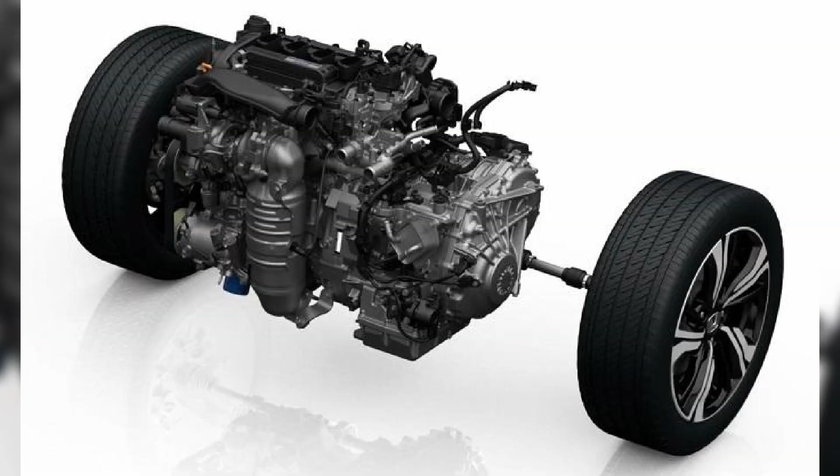In 1979, General Motors announced the X-Car program—the Chevrolet Citation, the Pontiac Phoenix, the Oldsmobile Omega, the Buick Skylark. Front-wheel drive, transverse-mounted four-cylinder engines. A fundamental architectural departure from the rear-wheel drive, longitudinal V8 configuration that had organized GM's engine plant infrastructure since the 1950s.

The X-Car program was not a niche product. It was GM's answer to the fuel economy crisis, designed to sell in volumes that would require full engine plant retooling across multiple facilities. The retooling call did not go to Rockford. GM's production engineering staff, working through the capital appropriation process for the X-Car engine plants, specified flexible machining systems for the new four-cylinder engine lines.

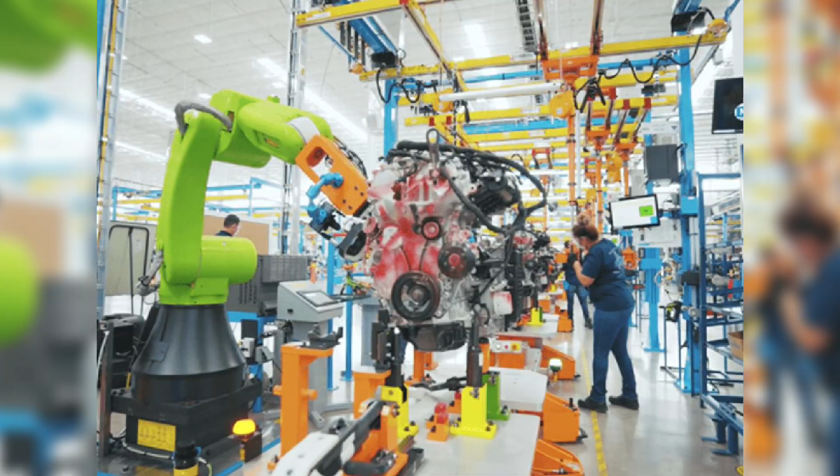The systems they ordered came from a list of suppliers that included Lamb Technicon in Warren, Michigan, another American transfer line builder facing the same structural pressure as Ingersoll, and increasingly from European builders—Comau of Italy, whose flexible manufacturing systems had been developed for Fiat's retooled engine plants in Turin, and Hüller-Hille of Germany, whose horizontal machining centers and FMS installations were equipped with Siemens and Fanuc controllers that American plant engineers were already comfortable specifying.

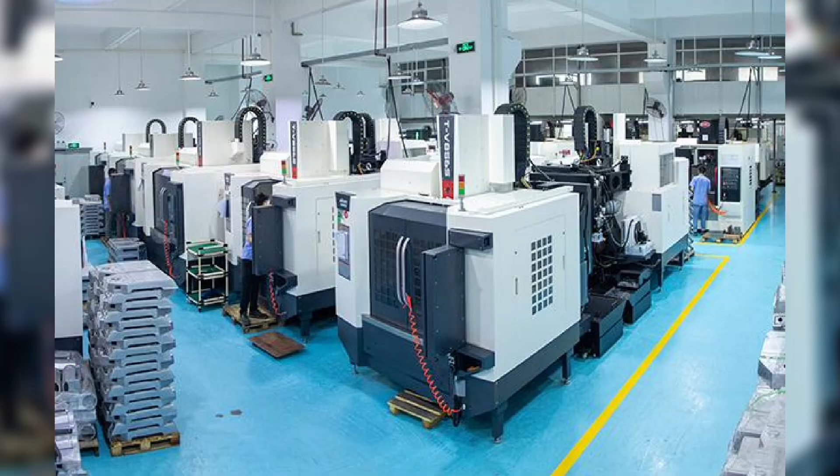The dollar figures tell the story with a precision that narrative cannot improve on. In 1978, Ingersoll's annual revenue from transfer line contracts with the American automotive industry was estimated at over $200 million. In 1982, that figure had fallen below $80 million. In 1986, it was below $40 million.

The plants had not changed. The engineering staff had not changed. The Factory Street manufacturing capacity had not changed. What had changed was the order flow. And when the order flow changed in the transfer line business, it changed completely, because transfer line contracts were not repeat orders for catalog products. They were one-time capital investments by customers who, once they had committed to a flexible manufacturing architecture, had no reason to return to a dedicated transfer line supplier.

General Motors' market share fell from 46% in 1978 to 33% in 1986. Every percentage point of that decline represented engine production volume that did not need to be machined, and transfer line capacity that did not need to be replaced.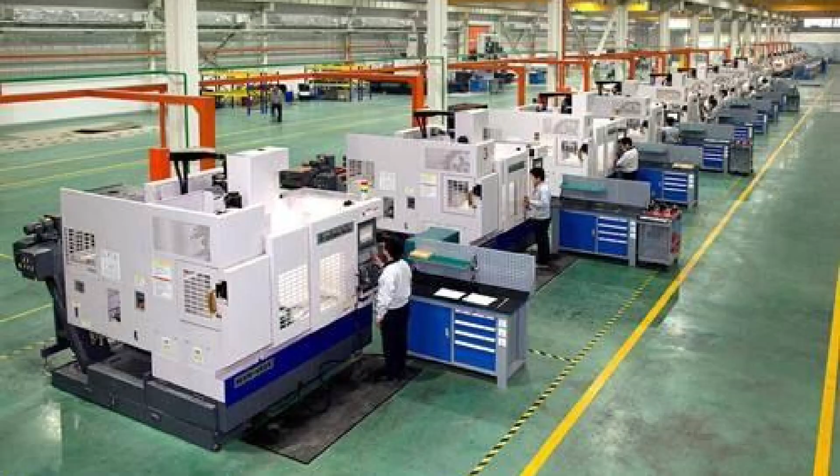Ford's market share held somewhat better, but Ford's response to the fuel economy crisis included a component sourcing strategy that shifted increasing volumes of engine parts to offshore suppliers, equipped with Japanese machining centers and European flexible manufacturing systems, none of which had been built in Rockford.

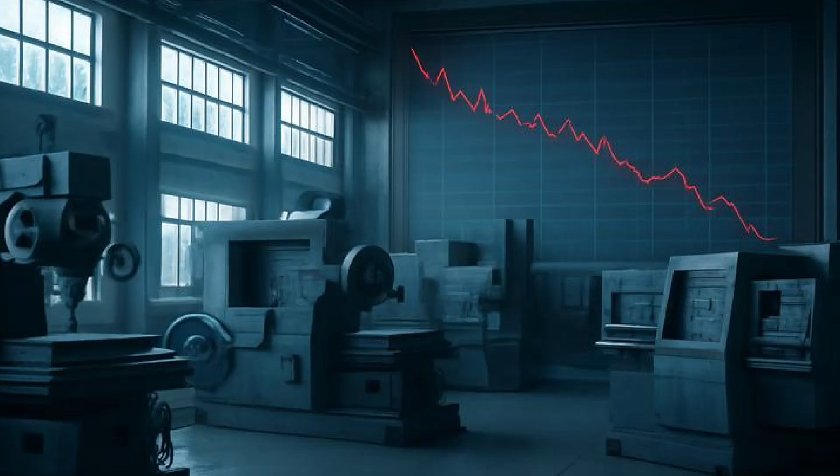Chrysler nearly ceased to exist. The federal loan guarantee that kept Chrysler operating in 1980 was not accompanied by a capital investment program for new engine plants. Chrysler's production engineering staff was managing survival, not expansion. The transfer line contracts that Chrysler would have placed with Ingersoll in a normal capital cycle were not placed with anyone. The three customers whose collective demand had sustained Factory Street's order book for 50 years were simultaneously contracting retooling away from dedicated transfer line architecture and, in one case, nearly liquidating.

The timing was not coincidental. It was structural: the simultaneous arrival of the fuel economy crisis, the Japanese automotive competitive challenge, and the CNC technology transition, in a market window of approximately four years from 1979 to 1983 that was too compressed for any fixed capital custom engineering business to navigate without fundamental restructuring.

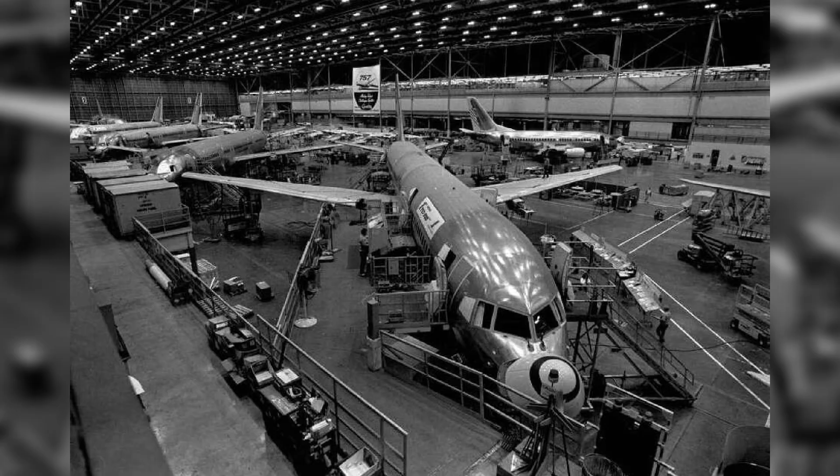Ingersoll attempted the restructuring. The aerospace deepening that had been a supplementary revenue stream since the 1950s was accelerated. Ingersoll's engineering staff pursued contracts for large-scale CNC machining systems for Boeing's commercial aircraft programs, the 757 and 767, both entering production in the early 1980s, and for Lockheed and General Dynamics military programs that required the kind of large-format precision machining that Ingersoll's Factory Street capacity was suited to deliver.

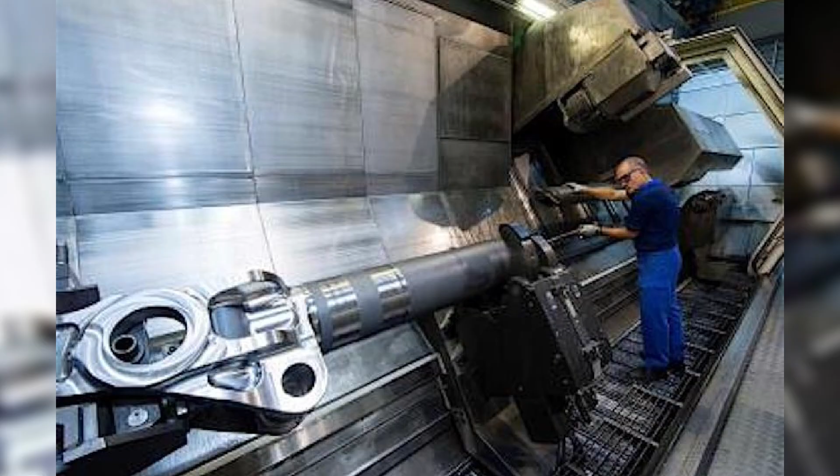The aerospace work was real. The contracts were real. The engineering was by any measure among the most demanding that Factory Street had ever executed. But aerospace volume was not automotive volume. A Boeing 757 program required machining systems for an aircraft produced in the hundreds, not the hundreds of thousands. The capital value of an aerospace machining contract was substantial. The production volume it sustained at Factory Street was a fraction of what a single GM engine plant retooling had once provided.

The workforce numbers record the arithmetic of the decline without editorializing: 4,000 workers at Factory Street in 1965, 3,200 in 1975, 1,800 in 1982, 900 in 1987. The reductions were not made in a single announcement. They came in increments: a layoff of 200 when a contract was delayed, a reduction of 150 when a program was canceled, a retirement not replaced when the order book did not justify the headcount. Each reduction was individually explicable. The cumulative pattern was a verdict.

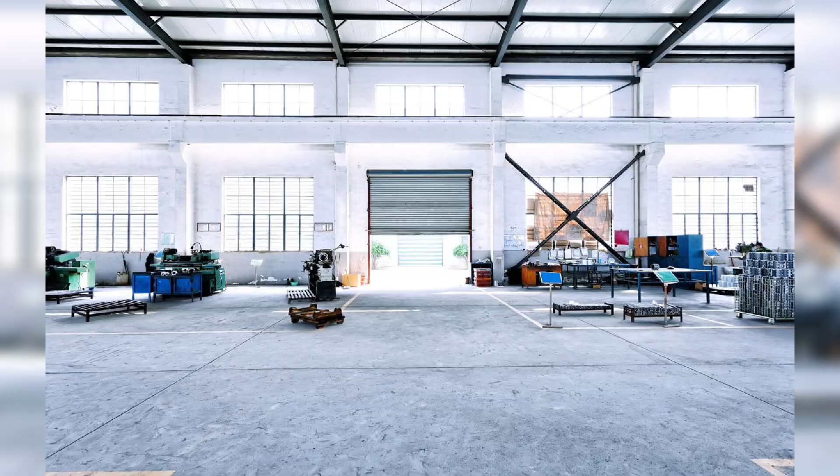The engineering staff, the men who had designed the Ford 5.8 transfer line successors, who had engineered the B-29 crankcase systems, who carried in their heads the accumulated transfer line knowledge of three generations of Factory Street practice, left in the same incremental way. Some retired. Some were hired by Lamb Technicon or by the European builders who were taking Ingersoll's contracts. Some left manufacturing engineering entirely. The knowledge they carried did not transfer to a successor institution. There was no successor institution.

By 1990, Rockford's manufacturing employment had fallen by more than 60% from its 1965 peak. The city's unemployment rate, which had averaged 4% through the 1960s, reached 18% in 1983, one of the highest rates of any American city outside the primary steel towns.

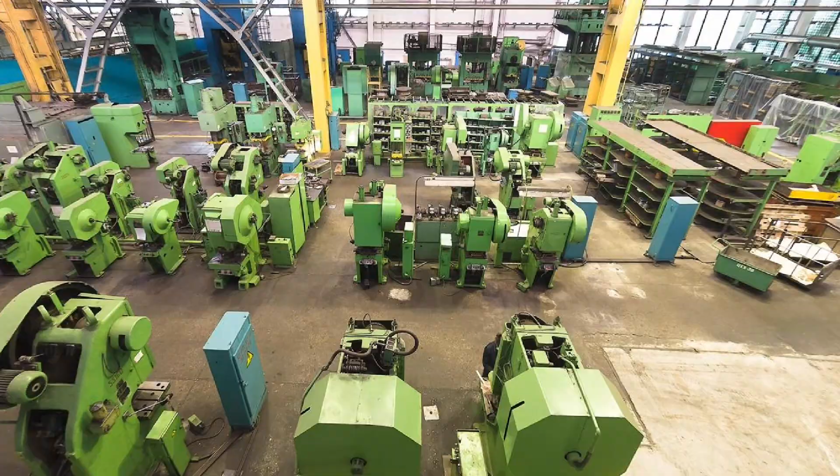The Sundstrand machine tool plant, which had been Rockford's other major machine tool employer, had been acquired by United Technologies in 1974, and its machine tool division sold, renamed, and ultimately closed. National Twist Drill, another Rockford institution, was gone. The supplier network that had fed Factory Street, the iron casting shops, the precision grinding operations, the heat treating facilities, contracted with it because their primary customer was contracting and their secondary customers were contracting for the same reasons.

Rockford did not lose Ingersoll. Rockford lost the ecosystem that Ingersoll had anchored, and the ecosystem, once it began to contract, contracted faster than any of its individual members could have arrested alone. The end, when it came, came in stages that each felt like the last stage until the next one arrived.

Ingersoll was acquired, restructured. The name was separated from the Factory Street operation. By 2001, the Ingersoll name, the name on the transfer line that had held the Wright R3350 crankcase to 2/10,000ths of an inch in Paterson, New Jersey in 1943, had been sold to a German industrial group. Factory Street went quiet. The drawings remained. Somewhere, the knowledge did not.

The machines Ingersoll built do not appear on eBay the way a Monarch 10EE toolroom lathe appears on eBay.

Listed by a retiring machinist in Ohio at $4,500, with photographs of the spindle nose, the serial number plate, and the handwheel graduations, drawing inquiries from buyers in four states within the first week.

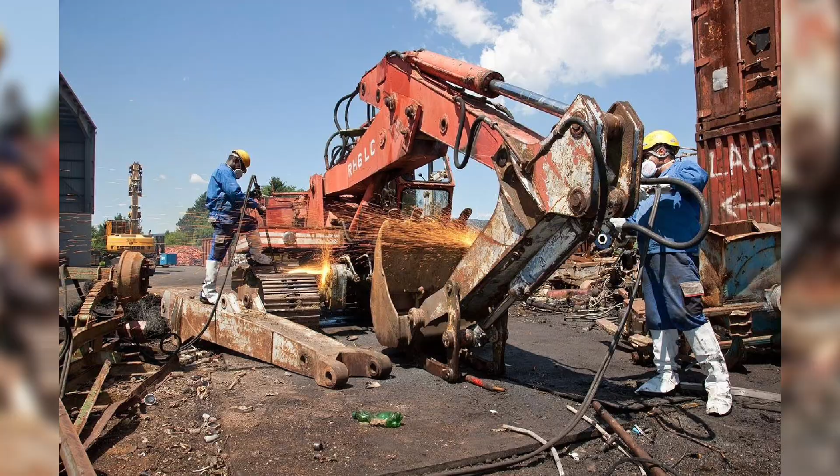A transfer line is not a machine that a retiring machinist owns. It is a machine that a corporation owns, and when the corporation retools or closes, the transfer line does not go to an estate sale. It goes to an industrial liquidator who sells the spindle heads, the fixture plates, and the hydraulic power units as individual components to whoever can use them, while the conveyor structure, guarding, and coolant systems go to the scrap dealer, because there is no market for a 60-foot transfer line frame outside the production context it was engineered for.

What survives of Ingersoll's work survives in pieces. In machine shops and small manufacturing facilities across the Midwest, individual spindle heads from Ingersoll transfer lines, the precision-assembled rotating units that held and drove the cutting tools at each machining station, have been mounted on custom bases and run as standalone drilling or milling units for work their original designers never anticipated. They run because Ingersoll built them to run. The bearing preloads were specified for 20 years of 3-shift operation in an automotive engine plant. A small shop running one spindle head 8 hours a day, 5 days a week will not wear it out in a lifetime. The Ingersoll name is cast into the housing. The tolerances are still there.

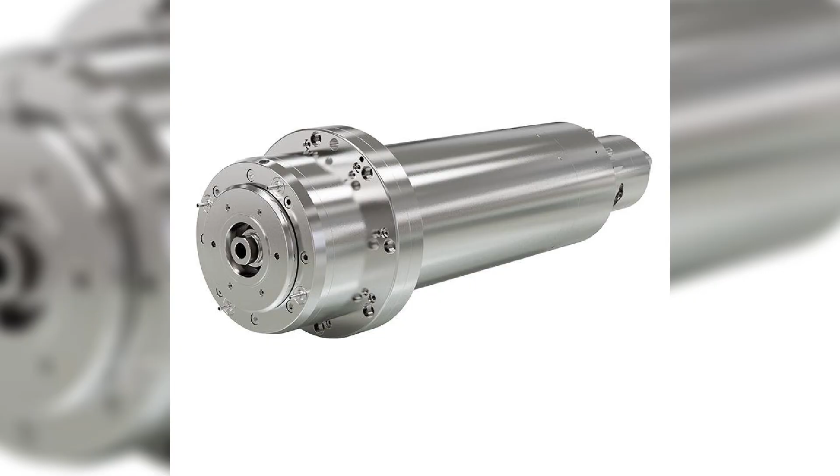The Rockford Public Library holds one of the most significant collections of Ingersoll historical material outside a corporate archive: photographs of the Factory Street plant at peak capacity, wartime production records, engineering department group photographs from the 1940s and 1950s, and a partial collection of American Machinist articles covering Ingersoll installations from the 1920s through the 1970s. The collection exists because a Rockford librarian understood in the early 1990s that the company's records were at risk as the organization contracted, and made the institutional effort to preserve what could be preserved before it dispersed. It is not a complete record. It is what survived the gap between institutional decline and institutional memory.

The Vintage Machinery website, vintagemachinery.org, holds scanned copies of Ingersoll catalog pages and technical documentation that collectors and industrial historians have contributed over the years. The material is fragmentary. Ingersoll did not produce the kind of retail catalog that a Brown & Sharpe or a Cincinnati Milacron published for its standard product lines, because Ingersoll did not sell standard products. What exists in the Vintage Machinery archive are engineering brochures, installation photographs, and the occasional technical specification sheet that a plant engineer had filed and that his successor had not discarded when the plant retooled.

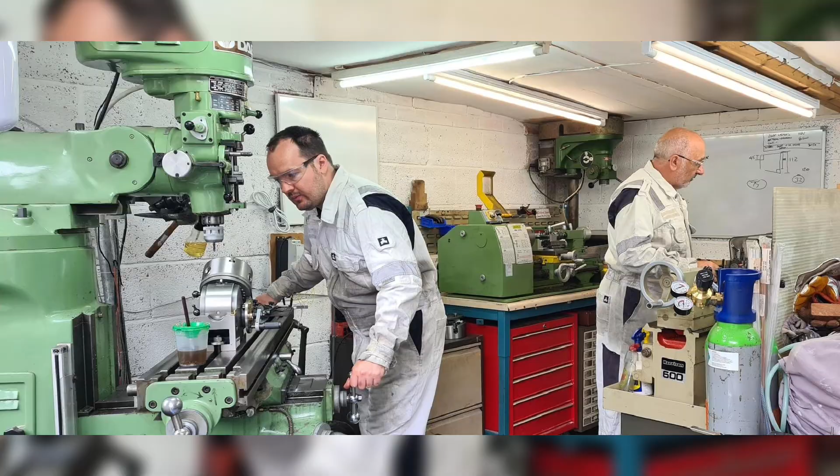The Practical Machinist Forum, practicalmachinist.com, contains threads about Ingersoll equipment that read differently from the threads about Monarch lathes or Bridgeport mills. The Monarch threads are written by men who own the machines, who are diagnosing a spindle bearing or sourcing a replacement apron gear. The Ingersoll threads are written by men who worked at the plants that ran the transfer lines, who remember the sound of a line running at full cycle, who remember the feel of setting up a fixture and verifying the datum surfaces with a test indicator before the shift started, who are looking for someone else who remembers the same things. They are not threads about maintenance. They are threads about memory.

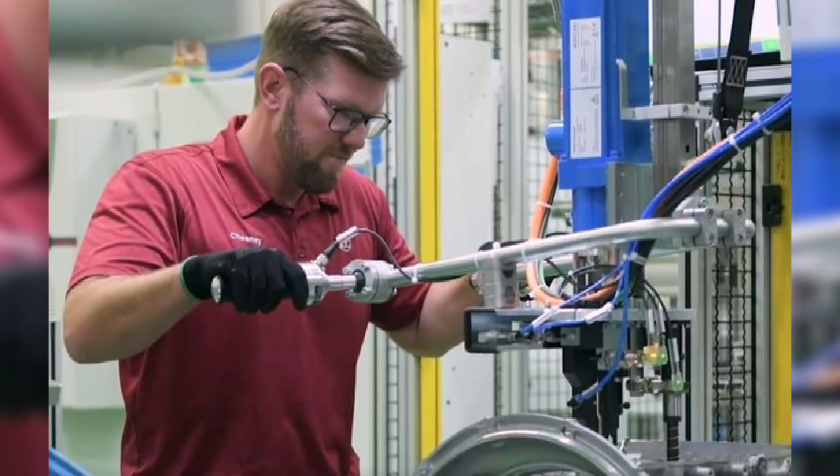The Smithsonian National Museum of American History holds documentation of Ingersoll's wartime production contributions, the B-17 wing spar milling machines, and the B-29 engine component transfer lines, as part of its American industrial history collections. The machines themselves are too large and too application-specific to be preserved as artifacts in the way that a Monarch 10EE or a Brown & Sharpe universal milling machine can be preserved. What the Smithsonian holds is the record of what the machines made possible: the production volumes, the tolerance achievements, the engineering decisions that allowed American aviation manufacturing to reach the output levels of 1944.

The professional categories that Ingersoll's existence had sustained did not survive its decline in any transferable form. The transfer line engineer, the man who could take a customer's casting drawing, analyze its machining requirements, design a 15-station transfer line system around those requirements, specify the fixture datums and the spindle head configurations and the conveyor timing, and hand the completed design package to a manufacturing floor that could build it, that professional category no longer exists in the United States as a practice discipline. There are engineers who understand the principles.

There are no engineers who have spent 20 years doing it, because there has been no American institution doing it for 20 years to employ them in.

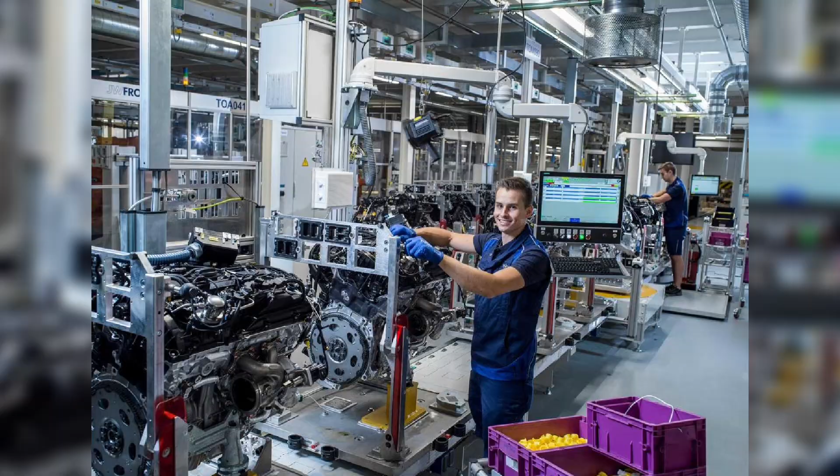The transfer line installation specialist, the man who could arrive at a customer's plant with an Ingersoll installation crew, commission a 12-station automotive transfer line, bring it to rated cycle time, verify its dimensional output against the engineering specification, and hand it over to production.

That professional category is gone in the same way. Not retired, discontinued. The work itself ceased to exist in America before the last practitioners had finished their careers.

The fixture designer, the multi-spindle head specialist, the transfer line application engineer who could walk a production superintendent through the capital justification for a $12 million system and leave the meeting with a signed letter of intent. These were American professional identities with apprenticeship pipelines, professional associations, and 40-year careers.

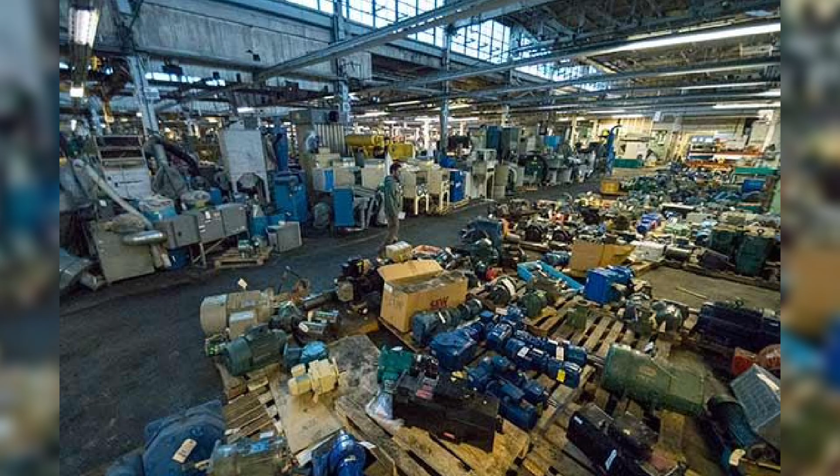They did not transition into equivalent roles in flexible manufacturing or CNC programming. The knowledge was too specific, the institutional context too particular, the market for the skill too completely eliminated to permit a graceful professional migration. They were made obsolete by the same forces that made Ingersoll obsolete.

And unlike the machines, they left no components behind that a small shop could mount on a custom base and run for another 30 years.

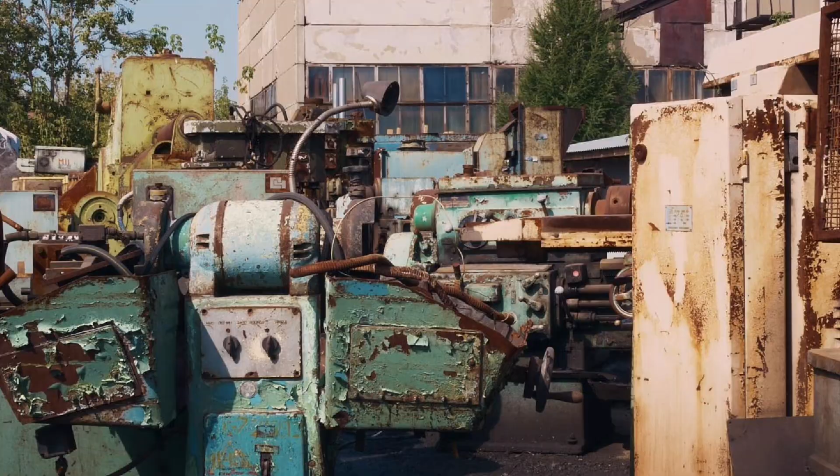Here's what the history books do not emphasize about the Ingersoll story, and should. The transfer line principle that Ingersoll perfected on Factory Street in 1932, the automated sequential machining of complex castings through a series of fixed stations, each performing one operation in a controlled sequence, is still the production method for every internal combustion engine block manufactured anywhere on Earth today.

The Toyota engine plant in Georgetown, Kentucky, the BMW engine plant in Spartanburg, South Carolina, the Honda engine plant in Anna, Ohio. Every one of those facilities runs transfer line equipment, automated, computer-controlled, equipped with CNC spindle heads and programmable fixtures that Ingersoll's 1940s engineering staff would not have recognized in their specific implementation.

But the principle, the workpiece moves through fixed stations, each station removes a defined amount of material in a defined sequence, the system produces finished engine blocks at a rate no individual machine can match, is Ingersoll's principle.

The machines that execute it were not made in Rockford. They were made in Italy, in Germany, in Japan. The engineering firms that design them do not have offices on Factory Street.

But the discipline they practice, the conviction that precision at volume achieved through a system engineered for a specific purpose is the foundation of productive manufacturing, is the discipline that Winthrop Ingersoll brought to Rockford, Illinois in 1887, and that 4,000 workers on Factory Street refined across a century of American industrial history.

Ingersoll lost the market. The principle never lost the argument.

In a surplus yard on the south side of Rockford, Illinois, less than 2 miles from the building where it was assembled in 1962, there is an Ingersoll transfer line spindle head, serial number stenciled in yellow paint on the cast iron housing. The spindle bore is still true. The bearing preload is still within specification. The coolant fittings are still threaded to the original standard.